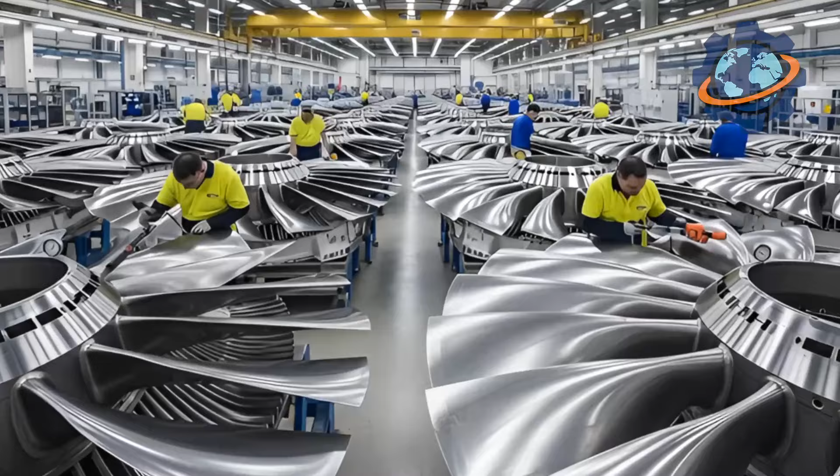Every second, jet engines spinning at 12,000 revolutions per minute thrust hundreds of passengers across continents. But here's what defies physics. Inside those engines, turbine blades made of nickel alloy operate at 3,000 degrees Fahrenheit, temperatures exceeding their own melting point by 200 degrees. Picture holding ice cubes in boiling water without them melting. That's the metallurgical miracle happening 35,000 feet above your head.

How does metal survive temperatures that should liquefy it? How do engineers grow crystals larger than your hand from molten metal? Stick around till the end, you'll discover the jaw-dropping secret of single crystal manufacturing that eliminated metal's greatest weakness, and why a single turbine blade costs more than your car yet lasts 20 years in literal hell.

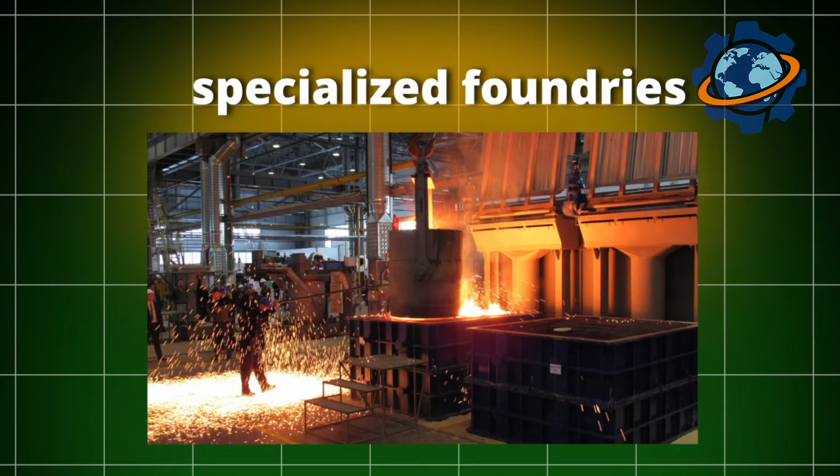The story begins in specialized foundries where cleanroom standards rival semiconductor fabs. These facilities maintain air purity of less than 100 particles per cubic foot, 10,000 times cleaner than normal atmosphere. Even microscopic dust particles cause catastrophic flaws in turbine blades spinning at speeds where centrifugal forces generate stresses exceeding 70,000 pounds per square inch. That's pressure crushing steel like aluminum foil.

Workers suit up in full-body cleanroom gear before entering casting halls. Inside, massive vacuum furnaces standing 2 stories tall and weighing 80 tons create environments replicating outer space. Vacuum pumps evacuate air until pressure drops to 1/1,000,000th of atmospheric pressure. At these conditions, materials behave differently. Impurities vaporize instantly. Gases trapped in metal escape, leaving behind purity impossible at normal pressure. Processing single batches costs $50,000 in electricity alone.

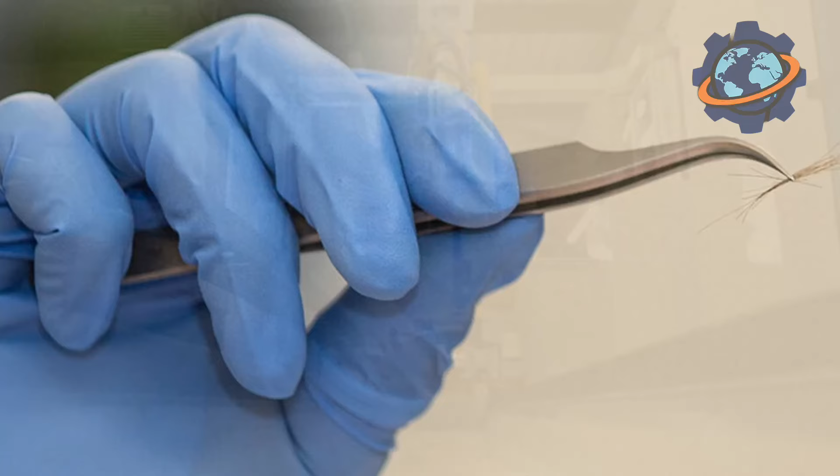Next comes mold preparation, where ceramic shells, think pottery on steroids, get built layer by microscopic layer. Technicians dip wax patterns shaped like turbine blades into ceramic slurry 10 times, waiting hours between coats. Each layer adds thickness thinner than human hair. After 20 days of coating and drying, workers melt wax away in autoclaves, leaving hollow ceramic molds with internal channels more complex than human circulatory systems.

These molds contain passages narrower than spaghetti strands, designed to cool blades from inside during operation. Some channels measure just 0.008 of an inch across, thinner than credit cards. Manufacturing these passages requires such precision that lasers verify every dimension. One blocked cooling hole means blade failure at 300 degrees lower temperature. That's the difference between safe flight and catastrophic engine disintegration at cruise altitude, scattering turbine fragments through the fuselage like shrapnel.

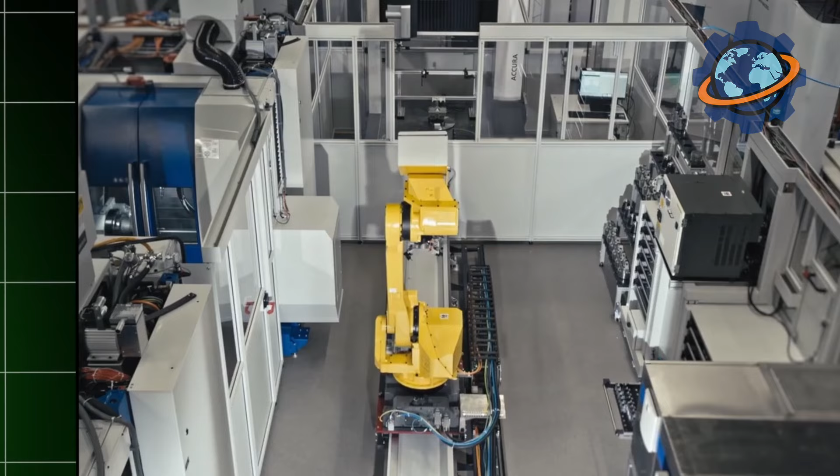Giant crucibles containing nickel-based superalloy. Mixtures of nickel, chromium, cobalt, aluminum, titanium, plus 6 other elements in exact proportions. Heat to 2,700 degrees Fahrenheit. Picture liquid metal glowing white like miniature stars captured in ceramic containers. This superalloy, developed through decades of research, contains more expensive elements per pound than fine jewelry. A single turbine blade uses materials costing $800 before any manufacturing begins.

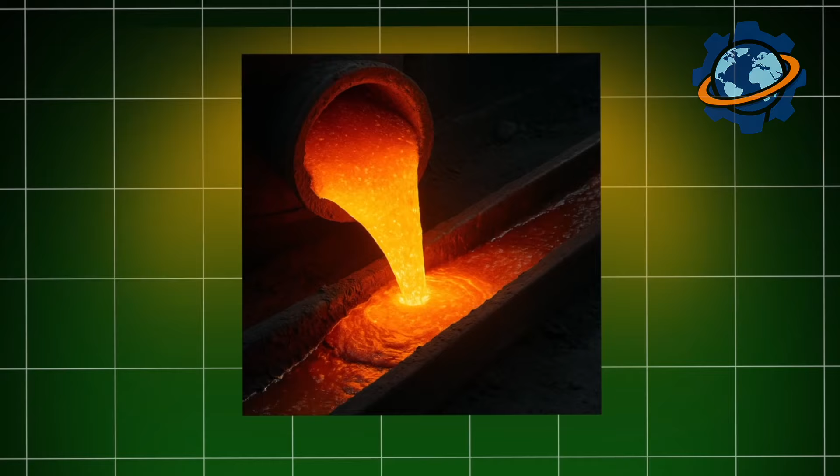Robotic arms lower ceramic molds into this molten inferno with precision measured in thousandths of inches. Timing matters critically here. Pour too fast, turbulence creates defects. Too slow, metal solidifies prematurely. Furnaces tilt at exactly 2 degrees per second, filling mold cavities in 17 seconds. During this pour, metal temperature drops 300 degrees, requiring computer-controlled heating to maintain consistency. One temperature fluctuation of 5 degrees ruins the casting, wasting months of preparation. Now comes the magic.

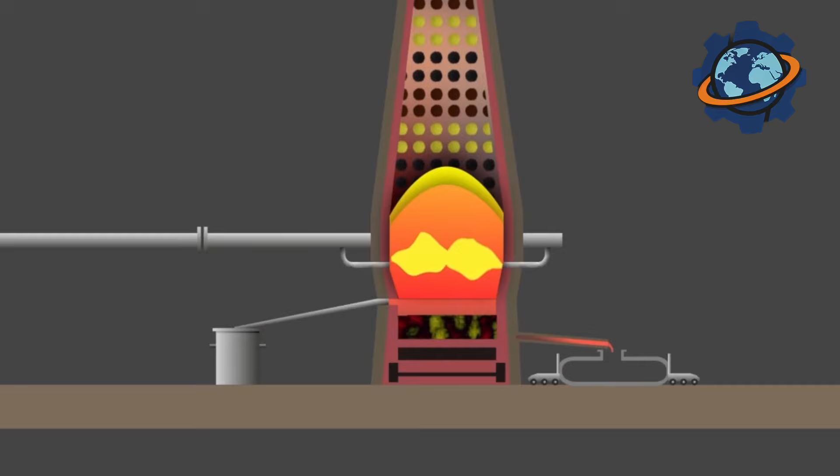Directional solidification. The filled mold sits atop a water-cooled chill plate at 70 degrees Fahrenheit while surrounded by heating elements maintaining 2,400 degrees above. This creates the steepest temperature gradient in metallurgy, over 2,000 degrees difference across 6 inches. That's transitioning from Arctic to volcanic conditions in the space between your thumb and pinky. Slowly, incredibly slowly, a computer-controlled mechanism lowers the mold through the furnace at speeds of 6 inches per hour. Picture watching paint dry, then slowing that down tenfold.

As the mold descends, metal solidifies from bottom upward in a razor-thin freezing front. This directional cooling forces crystal growth in one direction only, upward, eliminating horizontal grain boundaries where cracks normally form. The process takes 14 hours for a 4-inch blade. Rush it by even 10% and polycrystalline grains form, destroying blade strength. But here's where physics becomes art.

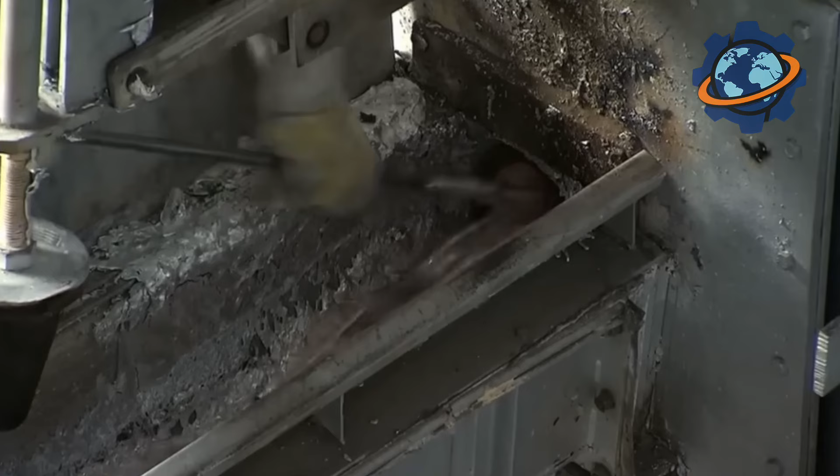At the mold bottom sits a grain selector, a corkscrew-shaped passage so narrow only one crystal nucleus fits through. As metal solidifies upward, countless tiny crystals form at the chill plate. They compete, growing upward like metallic trees racing toward sunlight. Most hit the spiral walls and stop. Only the perfectly aligned crystal, the one matching the spiral's orientation, passes through this metallurgical gauntlet.

This step is critical because it ensures the entire blade, every atom from root to tip, belongs to one continuous crystal lattice. No grain boundaries exist anywhere. Normal metals contain millions of grain boundaries per cubic inch. Single crystal blades contain 0. Without boundaries, there are no weak spots where atoms slip past each other under stress.

The crystal structure extends uninterrupted through the entire blade like a 3-dimensional molecular Kevlar vest, with atoms locked in perfect geometric formation. After solidification, blades undergo solution heat treatment at 2,200 degrees Fahrenheit for 2 hours, then quench in inert gas. This locks crystal structure permanently and precipitates microscopic strengthening phases throughout the lattice.

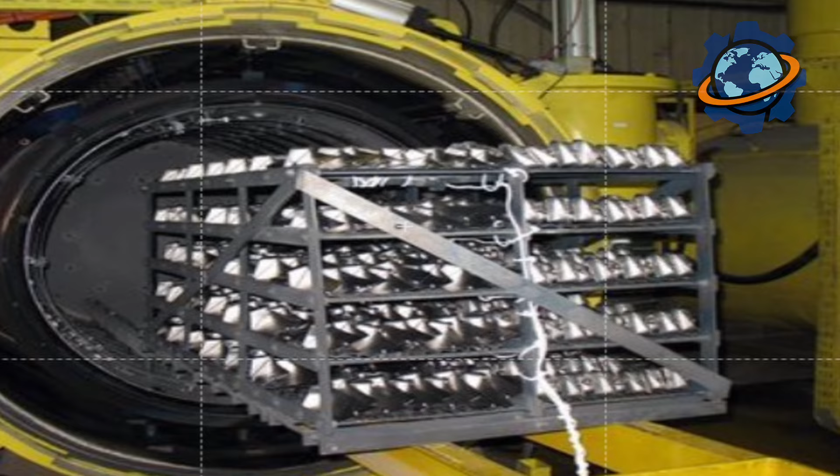Next comes aging heat treatment, multiple cycles at precisely controlled temperatures that cause nanoscale particles to form. These particles, called gamma-prime precipitates, occupy 70% of the alloy's volume. Picture this. Imagine a 3-dimensional checkerboard where hard particles pin the crystal lattice, preventing atoms from sliding. These precipitates remain stable at temperatures where other metals liquefy.

They're the secret allowing nickel alloys to maintain strength at 3,000 degrees, temperatures where aluminum vaporizes, titanium melts, and even steel becomes taffy. The heat treatment process takes 96 hours of precise temperature control. Deviate by 15 degrees at any point and mechanical properties drop 40%.

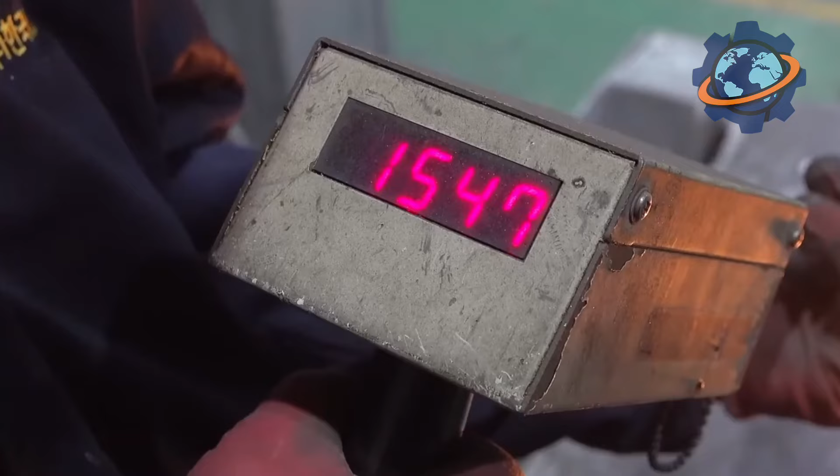Coating application transforms already sophisticated blades into thermal protection systems. First, a metallic bond coat, aluminum-rich alloy, gets applied via high-velocity plasma spray at 20,000 degrees Fahrenheit. Metal particles accelerate to twice the speed of sound, impacting the blade surface with such force they cold weld instantly. This creates a rough surface for subsequent layers while providing oxidation resistance.

Then comes the thermal barrier coating, Yttria-Stabilized Zirconia ceramic, applied atom layer by atom layer using electron beam physical vapor deposition. In vacuum chambers, electron beams vaporize ceramic ingots. The vapor condenses on rotating blades, building up a coating 0.008 of an inch thick with a columnar microstructure full of microscopic pores. These pores act like thermal insulation, trapping air pockets that reduce heat transfer.

The ceramic coating lowers blade temperature by 400 degrees, the difference between survival and meltdown. Modern engines couldn't exist without this coating technology. This wasn't always possible. Back in 1940, early jet engines used cast iron turbine blades lasting 20 hours before failure. Temperatures barely reached 1,400 degrees Fahrenheit.

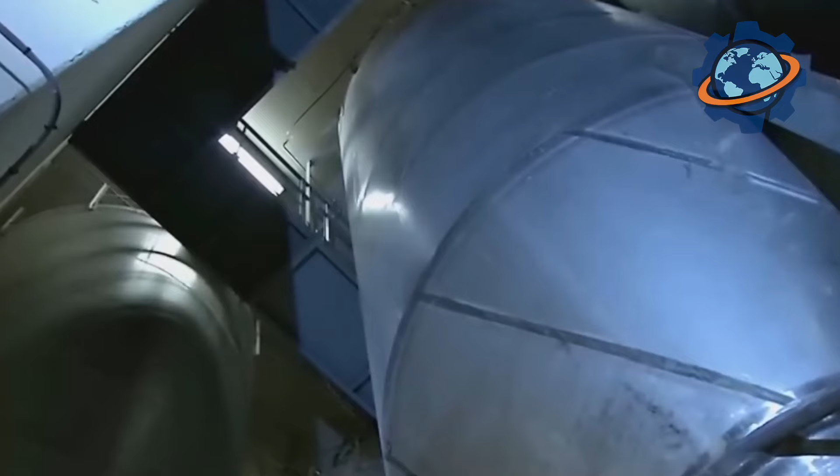The breakthrough came when Pratt & Whitney researcher Francis VerSnyder invented directional solidification in 1966, eliminating transverse grain boundaries and doubling blade life overnight. The true revolution arrived in 1982 when General Electric and Pratt & Whitney independently perfected single crystal casting. Turbine inlet temperatures jumped from 2,000 degrees to 3,000 degrees Fahrenheit, a 50% increase enabling massive efficiency gains. Modern turbofan engines achieve fuel efficiency triple that of 1960s designs.

Today, advanced engines like the GE9X powering Boeing 777X aircraft operate at 3,200 degrees, with pressure ratios reaching 60-to-1. These engineering advances cut aviation fuel consumption by 65% per passenger mile over 50 years. Carbon emissions dropped by 12% when replacing older turbine blades with modern single-crystal versions in existing engines, equivalent to removing 18 million cars annually from global fleets.

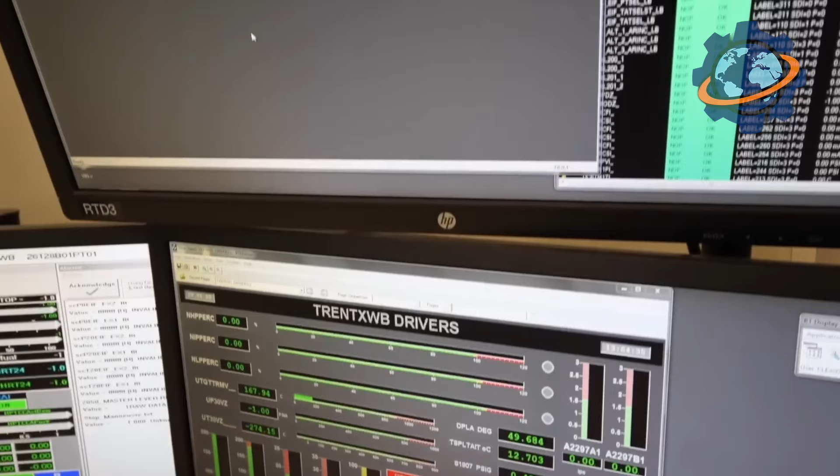Airlines save over $47 billion yearly through improved fuel efficiency. Maintenance costs drop 58% because single-crystal blades last 3 times longer than conventional ones. So here's the secret promised. These blades don't actually survive above their melting point through material strength alone.

They're actively cooled by air bled from the compressor, flowing through those microscopic internal channels at supersonic speeds. This cooling air, already compressed to 400 degrees Fahrenheit, seems hot by human standards but runs ice cold compared to the 3,000-degree combustion gases outside. Combined with ceramic coatings reflecting heat like mirrors, the actual metal temperature stays below 2,000 degrees, hot enough to glow orange but survivable. From molten metal to flying miracles, the cycle completes.

Single crystal turbine blades represent humanity's most sophisticated metal casting achievement. Objects where every atom's position matters, where crystal orientation determines survival, where manufacturing tolerances make computer chips look crude. We've engineered metal to survive in conditions nature never intended, creating materials that work at their physical limits. That's not just manufacturing, that's molecular architecture enabling the modern world's ability to shrink distance itself.

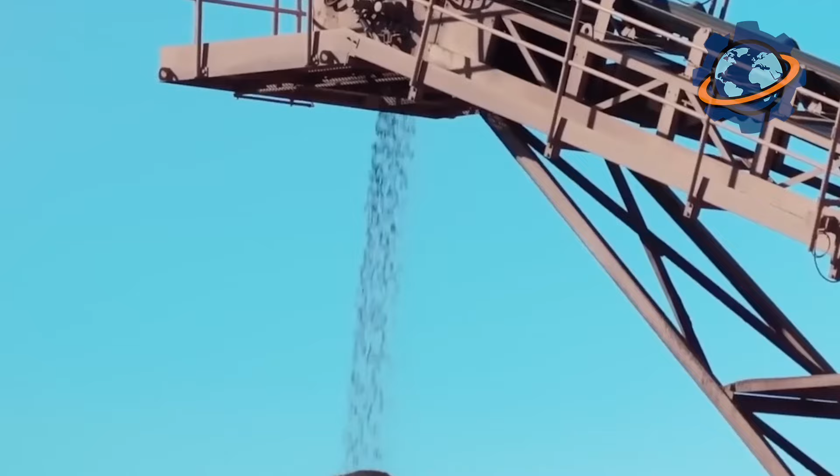Stick around till the end. You'll discover why iron shaped human history more than gold ever did, and the jaw-dropping secret hiding inside every bridge, car, and building around you right now.

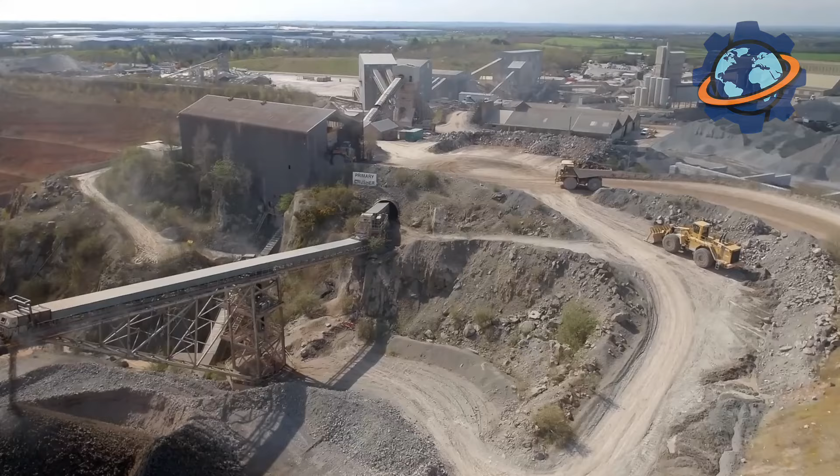The story begins in Western Australia's Pilbara region, where iron mountains stretch across landscapes older than dinosaurs. Massive excavators, standing 8 stories tall, picture buildings that walk, tear into rust-red cliffs with bucket teeth weighing 12 tons each. These mechanical giants rip through rock layers formed 3 billion years ago when Earth's oceans first rusted.

Next comes crushing, where house-sized jaw crushers, imagine dinosaur mouths made of hardened steel, pulverize boulders into gravel-sized chunks. With deafening roars splitting eardrums even through protection, these crushers generate forces exceeding 20,000 pounds per square inch. Clouds of red dust billowing upward create artificial sunsets visible from space satellites.

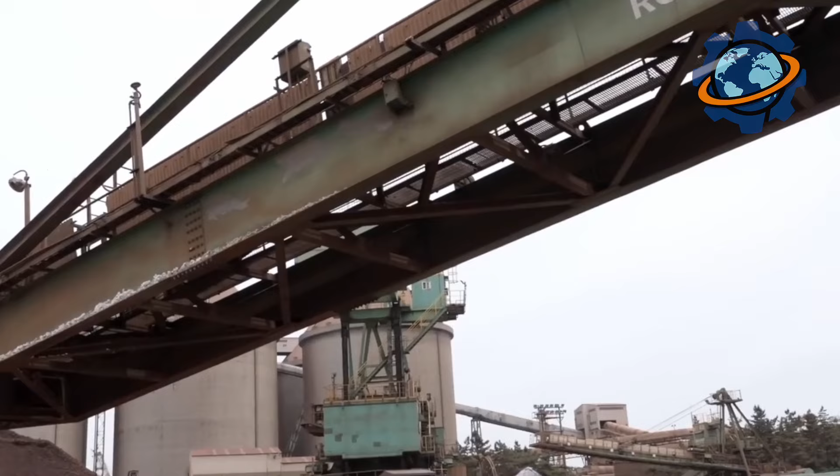Conveyor belts stretching 12 miles long, longer than Manhattan, transport crushed ore at 18 miles per hour. Workers riding inspection carts traverse distances requiring 25 minutes one way. That's enough belt to wrap around 300 football fields. Every hour, 50,000 tons flow through this system, weight equivalent to 5 Eiffel Towers moving continuously past checkpoints.

Giant grinding mills, standing 5 stories tall, with diameters matching Olympic swimming pool widths, pulverize rock into fine powder. Inside these rotating drums, 20-ton steel balls, each weighing more than shipping containers, tumble with ore, creating grinding thunder heard miles away. Operators monitor vibrations. Wrong frequencies mean catastrophic bearing failures, costing millions.

At rotation speeds creating gravitational forces triple normal Earth gravity, particles shrink to powder finer than talcum. Processing 8,000 tons hourly, that's filling semi-truck after semi-truck every 30 seconds. This powder, called concentrate, contains 65% iron. Magnetic separators then extract iron particles using forces strong enough to levitate railroad spikes, leaving waste rock behind.

Next comes the blast furnace, a towering inferno standing 30 stories high, its steel shell glowing dull orange even from outside. At internal temperatures exceeding 3,000 degrees Fahrenheit, hot enough to vaporize aluminum instantly, iron ore transforms into liquid metal. Picture Dante's Inferno engineered with precision. Measured charges of iron ore, coke, and limestone descend from the top, while superheated air blasts upward at 2,000 degrees from ring-shaped nozzles called tuyeres.

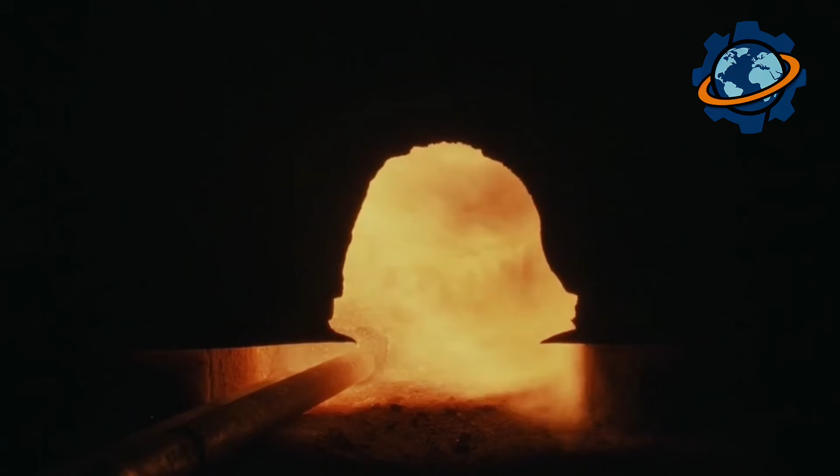This creates a raging chemical storm, where carbon monoxide rips oxygen from iron oxide molecules. The reaction releases enough heat to melt granite. Every 3 minutes, sensors check 20 different parameters. Without precision, furnaces explode with force demolishing city blocks. The blast furnace operates continuously for 15 years, never cooling, never stopping, like Earth's core relocated to industrial facilities.

Inside this chemical reactor, materials descend through distinct zones. Upper regions preheat incoming ore. Middle zones drive off moisture and carbon dioxide. Lower depths become hell itself, where iron liquefies. At the hearth bottom, molten iron collects at 2,800 degrees Fahrenheit, dense as lead but flowing like water.

Every 4 hours, workers drill through clay-plugged tap holes. Liquid iron erupts in blinding white rivers, flowing through ceramic channels into railroad cars holding 300 tons each. This step is critical because timing determines metal purity. Tap too early, slag contaminates. Too late, furnace pressure ruptures containment walls.

After tapping, slag, lighter impurities floating atop molten iron, gets diverted into separate channels. This glowing amber liquid, essentially liquefied rock, contains calcium, silicon, and aluminum oxides stripped from ore. Rather than waste, it becomes roadbed material and cement ingredient recycled at 98% rates globally.

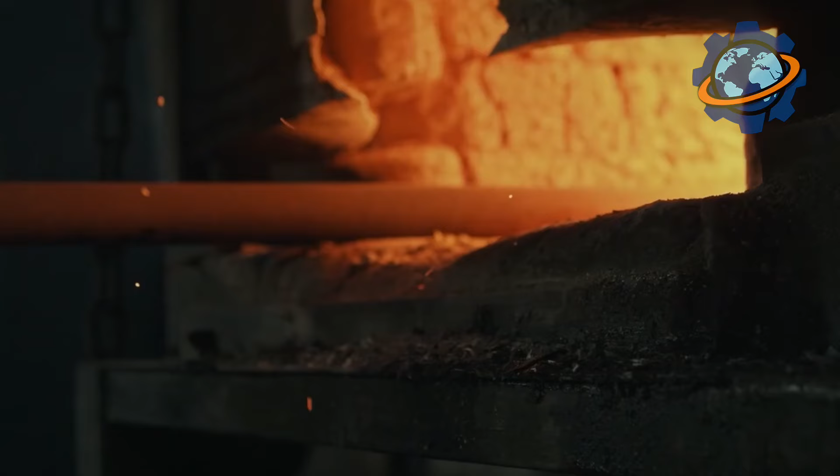The molten iron, called pig iron, contains 4% carbon, too brittle for construction. Picture glass that looks metallic. Drop pig iron from waist height, it shatters into fragments. Next comes the basic oxygen furnace, where pure oxygen blasted at supersonic speeds through 3-foot diameter lances burns away excess carbon in 17 minutes. Flames shooting 70 feet high, temperatures hitting 3,200 degrees, create hurricane-force winds inside steel vessels holding 350 tons of liquid metal.

Steel making requires precision rivaling brain surgery. Computer-controlled oxygen flow adjusts by milliseconds. Operators add exact amounts of manganese, silicon, chromium, elements changing steel properties dramatically. Too much carbon, steel cracks in winter cold. Too little, metal bends under load.

Picture this: alloying elements get injected via submerged lances. Electromagnetic stirring, invisible but powerful, homogenizes composition. Samples extracted every 3 minutes get analyzed via spectrometers, determining chemistry within seconds. Modern furnaces achieve carbon content accuracy to 0.01%, the difference between a skyscraper standing or collapsing.

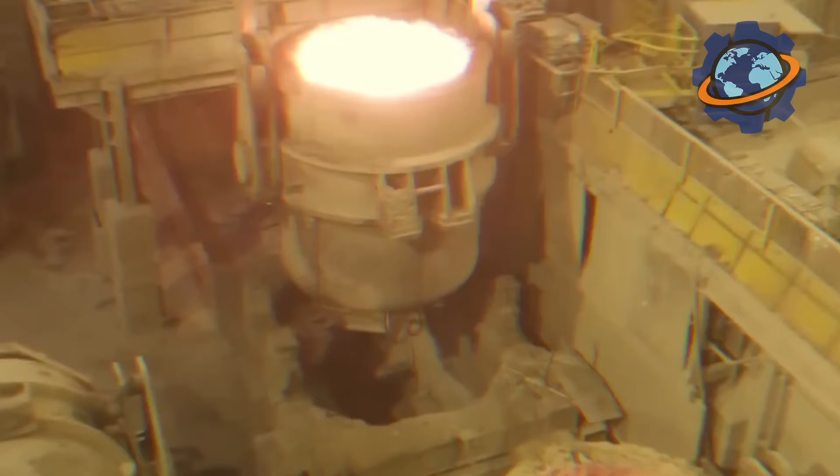After refining, liquid steel flows into continuous casting machines producing slabs 30 feet long, weighing 25 tons, at rates of 1 slab every 90 seconds. This wasn't always so advanced. Back in ancient Anatolia around 1300 BC, Hittite metallurgists discovered heating iron ore with charcoal produced workable metal. That breakthrough, accidental furnace conditions reaching iron's melting point, changed human civilization forever. Iron tools outperformed bronze, enabling an agriculture revolution.

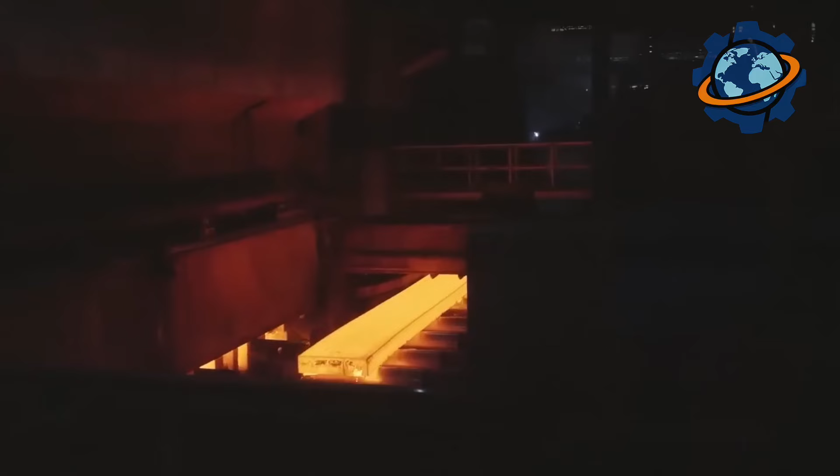The breakthrough came when British inventor Henry Bessemer patented his converter in 1856, slashing steel production time from 24 hours to 17 minutes. Suddenly, steel costs dropped 90%. This single invention built modern cities. Skyscrapers, bridges, railroads exploded across continents. Today, global steel production exceeds 1.9 billion tons annually. That's enough to build 75,000 Eiffel Towers yearly, or manufacture 43 million automobiles, or construct bridges connecting every coastline on Earth.

Carbon emissions drop by 62% when using recycled steel versus virgin ore, equivalent to removing 12 million cars annually. Industry saves over $80 billion yearly through scrap recycling. Processing costs drop 43% because melting scrap requires 1/3 the energy of blast furnaces.

So here's the secret promised. Every ton of steel you see, bridges, buildings, cars, will be recycled indefinitely. Unlike plastic decomposing into microparticles or paper pulping into mush, steel never degrades. Magnetic separation extracts it perfectly from demolished structures.

That girder in your office building might contain steel from 1930s locomotives. Your car's frame could include battleship armor from World War II. Nothing disappears. Metal merely transforms, reborn eternally. From ancient mountains to modern marvels, the cycle completes.

Iron, humanity's most essential metal, circulates through civilization like blood through veins. We're not consuming Earth's iron, we're borrowing it, briefly, before passing it forward to futures we'll never see.

Every year, over 30 million tons of bamboo are harvested worldwide. But did you know that this seemingly ordinary grass can transform into steel, silk, and even concrete? It grows faster than any tree, absorbs more carbon dioxide than a forest, and doesn't require replanting. But the most interesting part is what's hidden inside its fibers.

In this video, we'll show you how giant green stalks travel from plantations to ultra-durable flooring and delicate fabric. And if you watch until the end, you'll learn one shocking fact that will change your perception of the future of ecology.

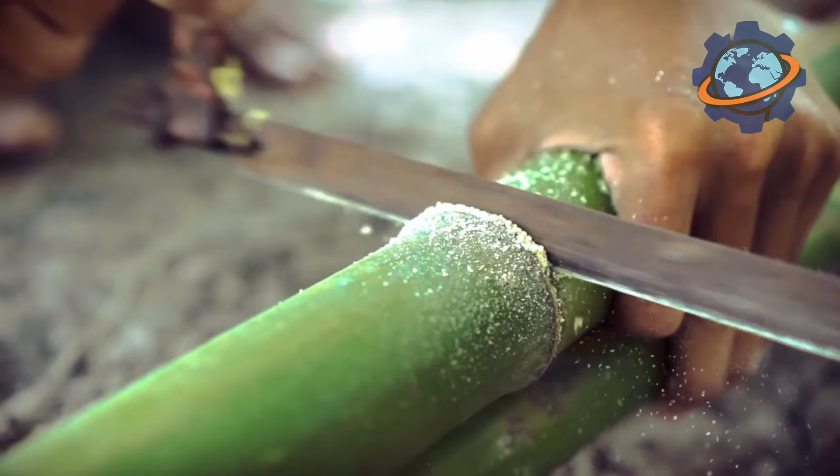It all begins on vast bamboo plantations, covering millions of acres around the world. These are not chaotic thickets, but carefully managed farms. Unlike forests, bamboo does not require replanting. When one stalk, or culm, is cut, its extensive root system, called a rhizome, immediately sends up new shoots.

This makes it one of the most sustainable resources on the planet. One plantation can yield harvests for decades without harming the soil. Moreover, a bamboo forest absorbs 35% more carbon dioxide and produces 35% more oxygen than an equivalent area of trees.

Harvesters, armed with simple machetes or handsaws, selectively cut only mature stalks, whose age can be easily determined by color and texture. Young shoots are left to grow further, ensuring the continuity of the cycle.

One such mature stalk can reach 60 feet in height and weigh over 100 pounds, making its transportation from the plantation to the primary processing plant a complex logistical task. When these green towers arrive for processing, their radical transformation begins.

First, the long stalks are cut into manageable sections. Then, they are fed into a special machine that, with a deafening crack, splits the round sections into long strips. The next step is to remove the outer green skin and inner nodes, leaving clean, light bamboo planks.

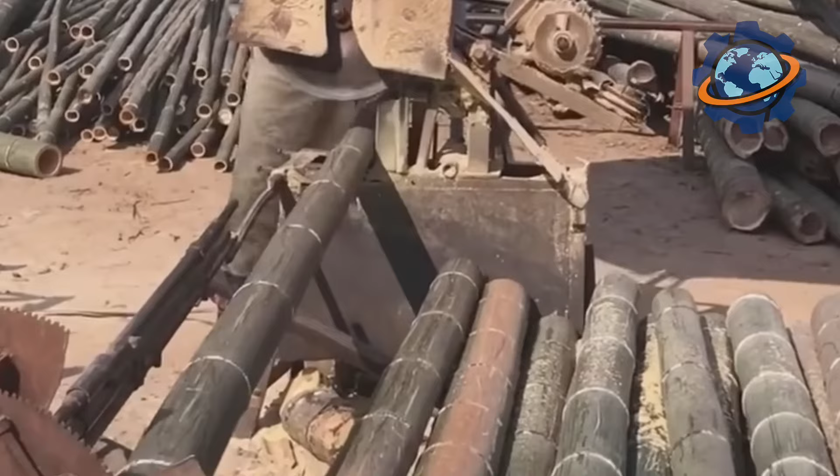But inside these planks still lurks an enemy of durability: starch and sugar, which are a favorite food for insects and mold. To get rid of them, the planks are submerged in huge vats of boiling water or a hydrogen peroxide solution for several hours. This hot bath not only sterilizes the bamboo, but also washes out all the nutrients.

After this, the planks are sent for drying. Some producers dry them in the open air, but for industrial scales, they are loaded into giant kiln dryers, where they spend several days until their moisture level drops from 50% to an ideal 8 or 10%. This stage is critically important, as any residual moisture can lead to warping and cracking of the finished product.

But the journey from a 60-foot pole to a smooth floorboard requires even more impressive engineering. The dried planks pass through milling machines that give them a perfectly rectangular shape. Then begins a process similar to making industrial lasagna.

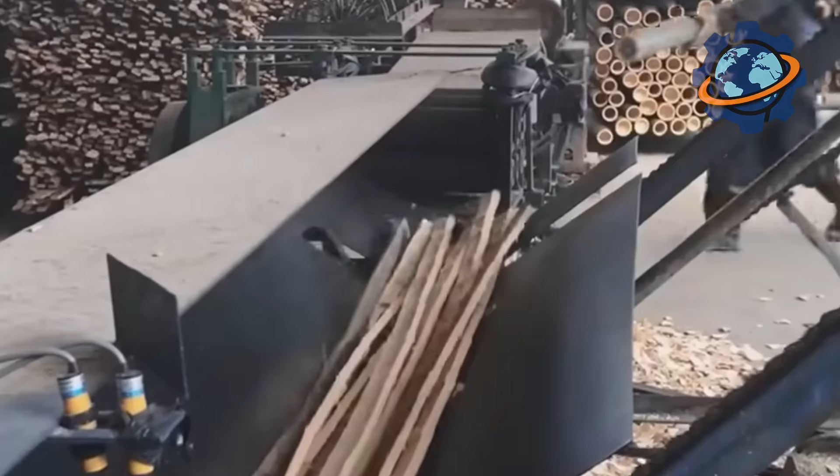To create horizontal flooring, the planks are laid in a single layer and glued under pressure. For vertical flooring, the planks are placed on their edge and pressed from the side, creating a denser pattern. But the real marvel is the strand woven technology.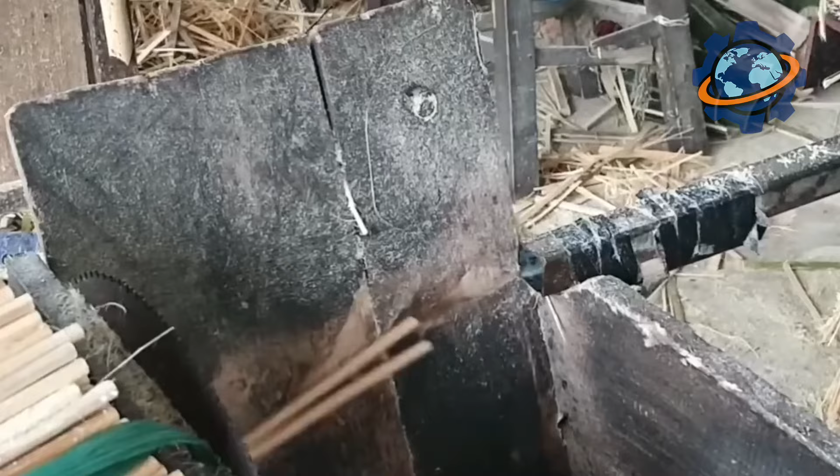Here, the bamboo planks are not just glued together, but completely shredded into long fibers, mixed with an environmentally friendly resin, and loaded into huge steel presses. Under infernal pressure, reaching 3,000 pounds per square inch, and high temperature, this mass transforms into an extremely dense, monolithic block.

The hardness of such flooring on the Janka scale can exceed 5,000 units, making it more than 3 times harder than oak, and more resistant to scratches and dents than most traditional wood species.

However, hardness is only one of bamboo's facets. Its other superpower is the ability to transform into something incredibly soft and silky. The process of creating bamboo fabric is a true industrial alchemy. The most common method, known as the viscose process, begins with grinding the bamboo raw material into a cellulose pulp.

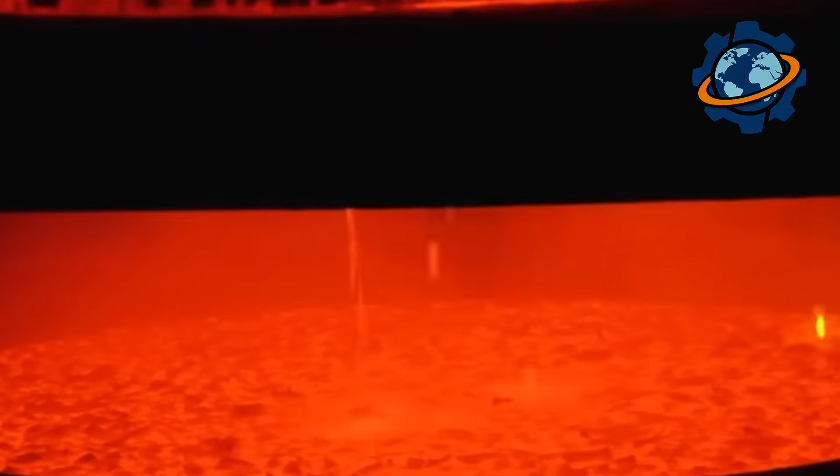This pulp is then submerged in a sodium hydroxide solution and then carbon disulfide, which turns it into a thick, viscous liquid. This liquid, resembling honey, is forced under pressure through the finest holes of a metal plate called a spinneret. Imagine a microscopic shower. Emerging from the holes, the thin streams enter a bath of sulfuric acid, where they instantly solidify, turning into endlessly long fibers. These fibers are then washed, bleached, dried, and twisted into yarn, from which fabric is woven.

Despite the complex chemical process, the final product is biodegradable and has unique properties. It is extremely soft, hypoallergenic, has natural antibacterial properties, and breathes wonderfully, making it ideal for clothing and bedding. The global bamboo market is colossal and is projected to exceed $100 billion in the coming years.

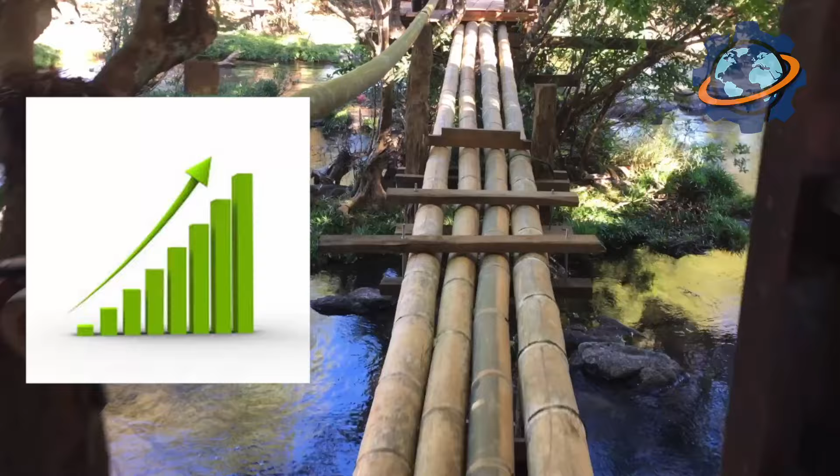Annually, over 30 million tons of bamboo are harvested worldwide, and this figure is only growing. From kitchen cutting boards and toothbrushes to construction scaffolding capable of supporting the weight of concrete and elements in premium class cars, this giant grass demonstrates its versatility. It is a testament to how nature, multiplied by human ingenuity, can offer sustainable, strong, and beautiful solutions for countless tasks, turning a fast-growing straw into the gold of the modern world.

Bamboo grows both in the wild and on specially created plantations. Its natural habitat mainly covers tropical and subtropical regions of Asia, where it is an integral part of local ecosystems. At the same time, thanks to its unique properties and wide range of applications, bamboo is actively cultivated on plantations around the world. It is cultivated for the production of building materials, textiles, paper, interior items, and as a source of biomass.

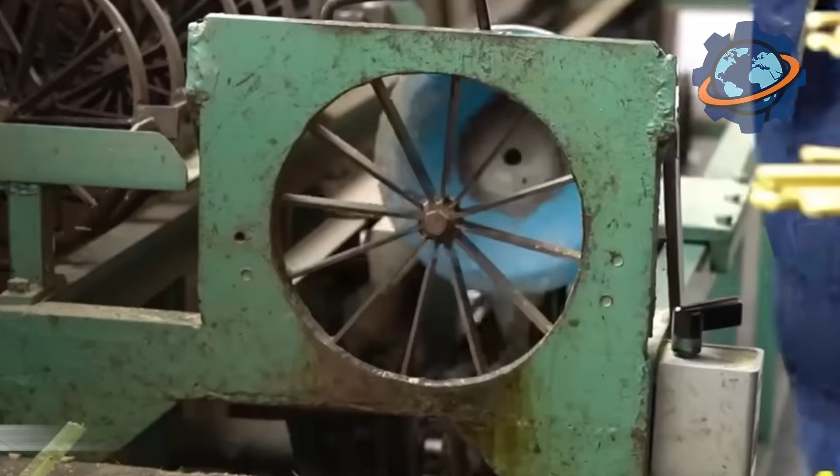In the wild, there are over 1,000 species of bamboo. It is a perennial evergreen plant belonging to the grass family. Bamboo is known for its extremely fast growth. Some species can grow several tens of centimeters per day. Bamboo blooms very rarely, and after flowering and fruiting, the plant usually dies. Growing bamboo requires certain knowledge and care, including proper planting, regular watering, and choosing the right variety for specific climatic conditions. There are even ornamental types of bamboo that are grown in gardens and at home.

Every year, the world lays down over 1 billion tons of asphalt, the material that modern civilization would literally grind to a halt without. But few people know that every foot of road is the result of a complex alchemy of stone, fire, and oil. It all starts with an explosion in a quarry and ends with a hot, black mass steaming under the wheels of a roller. In this video, you'll see how asphalt is born, from blasting rock to the final roller that polishes a new road. And if you stick around to the end, you'll learn a secret that most drivers don't even know exists.

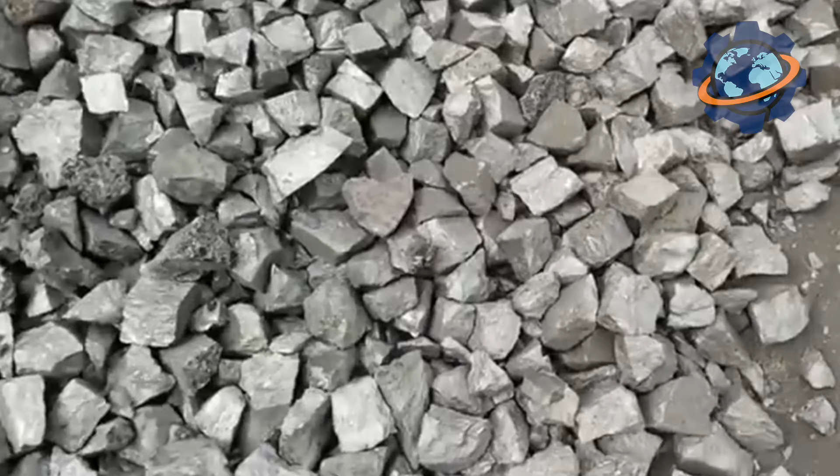Almost nothing goes to waste. That crushed old asphalt is then added to the new mix back at the plant. On average, new asphalt laid on our roads contains about 22% recycled material. The payoff here is huge, both economically and for the environment. First, it drastically cuts down on the need to quarry new stone and produce new bitumen, which saves natural resources and energy. Second, it makes the final product cheaper, saving billions of dollars from road maintenance budgets.

So, every car trip you take is a journey on a complex piece of engineering that not only withstands massive loads, but is also a prime example of an industrial ecosystem where the old is constantly reborn into the new, closing the loop and making the country's infrastructure a little more sustainable.

The story of asphalt doesn't start on the road. It starts in two completely different places. The first is a quarry. It's a massive wound on the face of the earth where rock is blasted out. It all begins with a loud explosion that shakes the ground for miles. Huge boulders break away from the rock face. Then, giant haul trucks with wheels taller than a person move in and haul these stone boulders to the primary crusher. This is a metal monster that crushes massive boulders into smaller chunks with its steel jaws and incredible force.

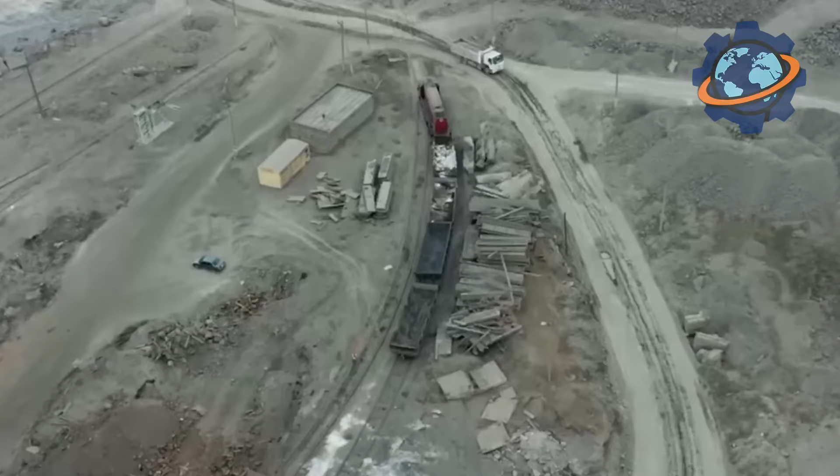But that's just the beginning. The stone then goes through a whole series of crushers and screens, giant vibrating sieves. The goal isn't just to crush the rock, but to carefully sort it by size. The result is entire mountains of clean, sorted stone, which we call aggregate. You've got everything here, from large, fist-sized rocks to fine crumbs and even dust, like sand. Each size is stored in its own separate pile.

It's like in your kitchen, where you have flour, sugar, and salt, each ingredient separate, waiting for its turn. This is the skeleton of the future asphalt, making up 95% of its mass. The second place where asphalt is born is an oil refinery.

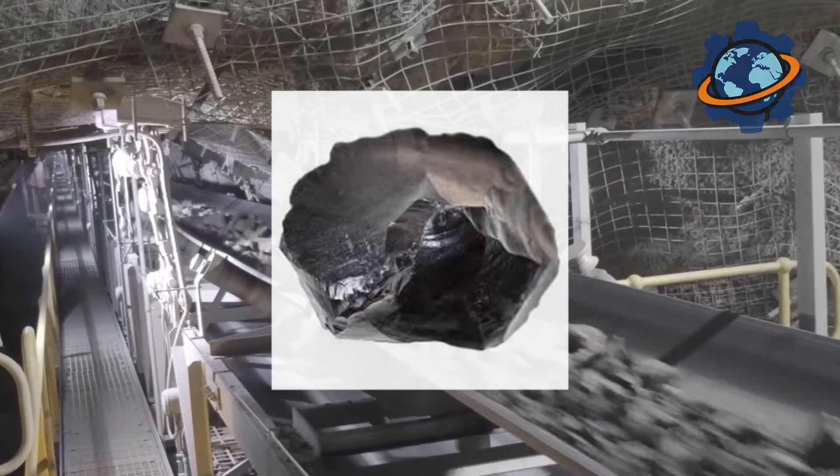When crude oil is processed into gasoline, diesel, jet fuel, and other light products, a thick, black, viscous substance is left at the very bottom of the distillation tower. This is bitumen. In its normal state, at room temperature, it's as hard as a rock. You can shatter it with a hammer. But if you heat it up, it becomes a liquid, like thick syrup.

It's this property, being solid when cold and liquid when hot, that makes it the perfect glue for our stone skeleton. Bitumen is the soul of asphalt. It's the black heart that holds everything together.

Now, let's head over to the asphalt plant. This is where all the ingredients come together. From a distance, it looks like a complex tangled metal jungle. Tall silos, endless conveyor belts, pipes, tanks, and a central tower with smoke rising from it. It's a real factory that works like a single, well-oiled machine.

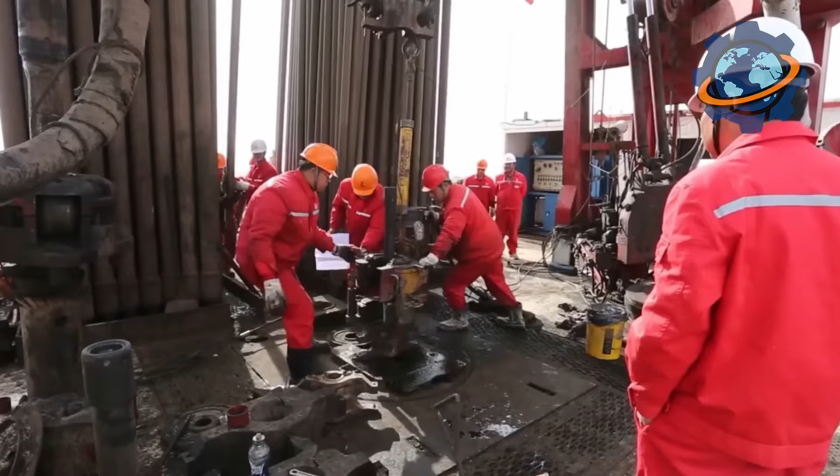Different sizes of aggregate are fed from separate bins onto a conveyor belt. But not just randomly. The whole process is controlled by a computer. An operator in a control booth inputs the exact recipe for the asphalt. Depending on where it's going to be used, a busy highway or a quiet side street, the recipe will be different. The computer knows exactly what percentage of large stone, medium, small, and dust is needed for the perfect mix. It's like baking a complex cake, where every gram counts.

This mix of stones begins its journey up a long, inclined conveyor and enters the heart of the plant, the drying drum. This is a huge, long tube that slowly rotates, set at a slight angle. From one end, a powerful burner blasts a roaring pillar of fire inside, like a jet engine. The temperature inside hits 300 degrees Fahrenheit. The stone, slowly tumbling inside this drum, heats up, and most importantly, gets completely dried out.

Moisture is the #1 enemy of good asphalt. Even a single drop of water can prevent the bitumen from sticking properly to the stone's surface. So, the stone has to be bone dry. After the drying drum, the hot, moisture-free stone is carried up by an elevator to the very top of the central tower.

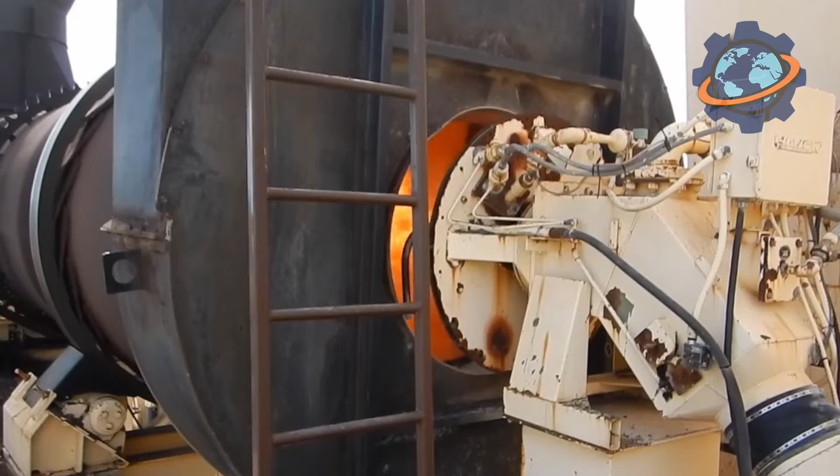There, it passes through another set of screens for a final quality check on the sorting, and then falls into hot storage bins. Meanwhile, in special insulated tanks, our black glue, the bitumen, is being heated up. It's also brought to a high temperature to make it fluid and runny. And now comes the climax. The computer gives another command.

A weigh hopper, with incredible accuracy, measures out the required amount of hot stone of each size from the different bins. Then, a precisely measured amount of hot liquid bitumen is sprayed into this superheated stone mix. This entire mass, stone and bitumen, is dropped into a mixing chamber called a pug mill. It's like a giant kitchen mixer, but instead of whisks, it has 2 powerful shafts with metal paddles.

These paddles churn the hot mass with enormous force, and in less than a minute, every single stone, every grain of sand, is coated in a thin, shiny film of black bitumen. Out of the chamber comes the finished asphalt, a uniform, steaming black mass with a characteristic oily smell.

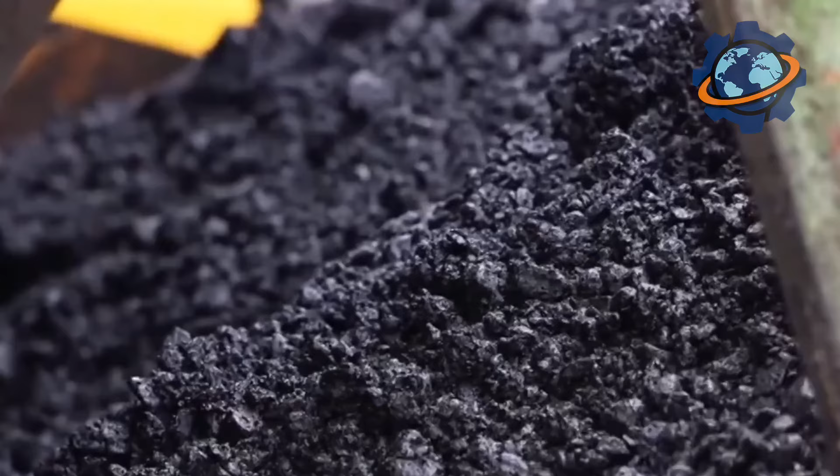Now this hot, freshly made product needs to be stored until it's shipped out. It's lifted and dumped into special insulated storage silos. They're like giant thermoses that can keep the asphalt hot for many hours, sometimes even days. Dump trucks pull up under these silos.

With a loud clang, a gate opens and several tons of hot asphalt pour into the truck's bed with a roar and a cloud of steam. The bed is always covered with a tarp to keep that precious heat in during transport to the paving site. At the construction site, the final act begins. The dump truck slowly unloads the hot mix into the hopper of a special machine, an asphalt paver.

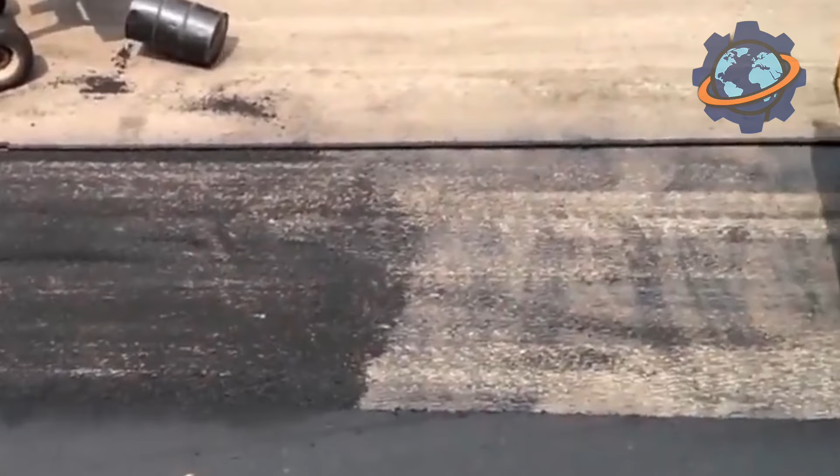This machine, moving forward slowly, evenly spreads the asphalt over the road surface, forming a perfectly level layer of a specific thickness. At the back of the paver is a heavy, heated plate called a screed. It does the initial compaction and gives the surface its first pass of smoothness, but the asphalt is still soft and loose. To make it strong, it needs to be compacted.

Right behind the paver follows a whole team of heavy road rollers. First come the large steel drum rollers, which use their immense pressure to squeeze the air out of the asphalt mix and force the stones to lock together tightly. Then, pneumatic tire rollers might be used, which knead the surface, making it even denser.

And in the final stage, smooth steel drum rollers pass over it again to give the road its final, smooth finish. As the asphalt cools, the bitumen turns from a liquid back into a solid. It permanently glues all the stones together, turning the loose mix into a strong, waterproof monolith. After a few hours, the road that was recently hot and soft becomes hard and ready for traffic.

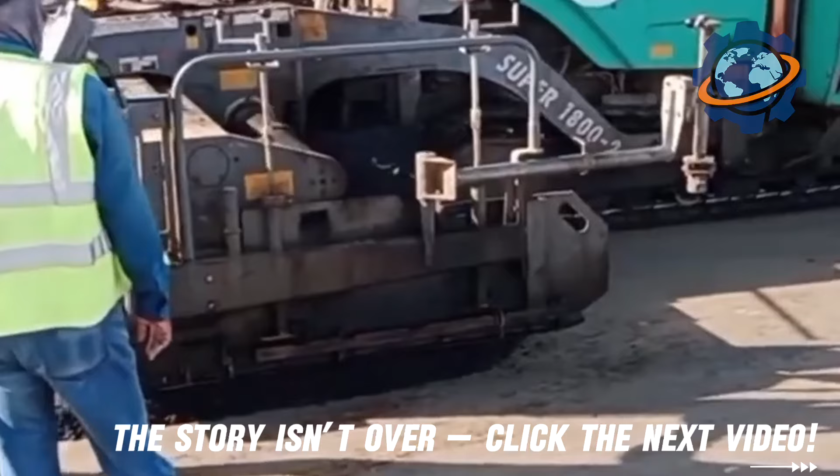And that's the whole point. From the explosion in the quarry to the heavy roller on the road, every stage of this process is designed to create a durable, reliable surface that will withstand thousands of cars every single day.

Every year, over 100,000 kilometers of new rails are laid across the planet, and every single one of them goes through hell first. Fire over 1,500 degrees, the crushing force of rollers, and jets of water that cut metal like glass. From scrap heap to gleaming steel, a rail's journey is like an initiation, where every step decides whether it survives or shatters under the first train.

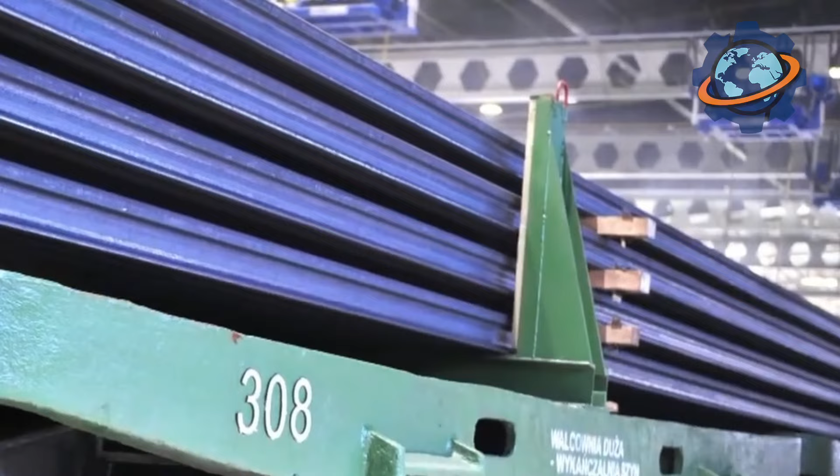But what makes this steel so perfect that it can handle thousands of tons of pressure every day without bending or cracking? Stick around, and you'll see how the arteries that move the entire world are born.

First, you gotta make the steel. A mix of scrap metal, iron ore, coke, and limestone gets dumped into the furnace, the raw ingredients for a future rail. The temperature in the blast furnace hits over 2,700 degrees Fahrenheit. That's 1,500 Celsius. Under that hellish heat, the metal turns liquid, glowing like the sun. Workers keep a close eye on the composition. Even an extra 0.1% of carbon can make the rail too brittle or too soft.

After melting, the molten steel is poured into molds, metal forms that create rectangular blocks called ingots or slabs. They don't look like a rail yet, just solid bars a few meters long and over a foot wide. After pouring, each blank is cooled, but not completely. It's kept warm to reduce stress during the rolling process.

This stage is the foundation for everything. If the steel comes out bad, even a perfect rolling job won't save it. So quality control here is almost a ritual. Chemists check the composition, metallurgists monitor the temperature, and automatic sensors track the cooling uniformity. Only when every single parameter is locked in does the blank move on into the fiery heart of the rolling mill.

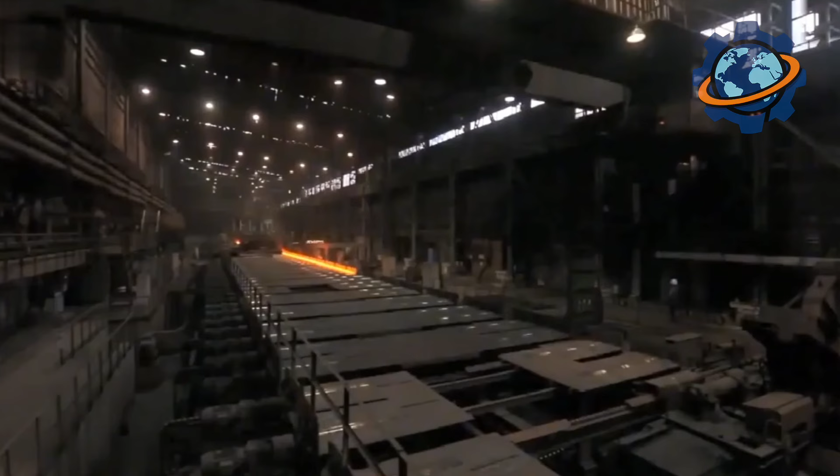In the rolling mill, massive billets, up to 20 meters long, are heated in furnaces to over 2,200 degrees Fahrenheit, 1,200 Celsius. The metal becomes pliable, like dough, but keeps its density and strength. The hot blank is immediately fed into reversing rolling stands. These are huge machines with heavy rollers. It passes through them several times, first to reduce its thickness, then to give it the right shape.

Each pass is a squeeze and stretch, gradually transforming the metal from a simple billet into a future rail with its complex profile: the head, the web, and the foot. To get the exact geometry, they use a final sizing roll. It's like the final polish of the shape, with tolerances on this step not exceeding 0.3 of a millimeter.

Right after rolling, while the rails are still hot, they go through a cooling process. They're either evenly blasted with air or left to cool on an open rack. It's crucial that the cooling is symmetrical, otherwise the metal could warp. To ensure a smooth, bump-free ride at high speed, individual rails are welded into long sections, up to 400 meters without a single joint. The main method is thermite welding.

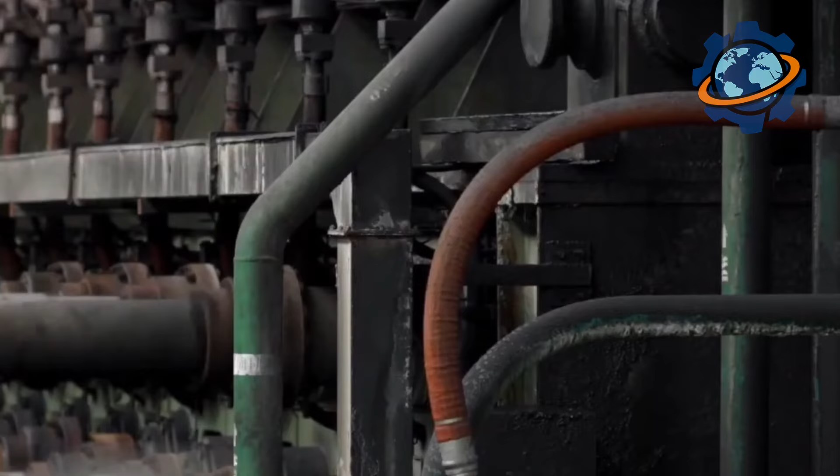In a special mold between two rails, a gap of a few millimeters is left. A molten steel mixture, created by the reaction of powdered aluminum with iron oxide, is poured in. The temperature hits a scorching 4,500 degrees Fahrenheit, 2,500 Celsius. This molten metal flows into both parts of the rail and fills the joint area. When it solidifies, it creates a monolithic bond, stronger than the rail itself.

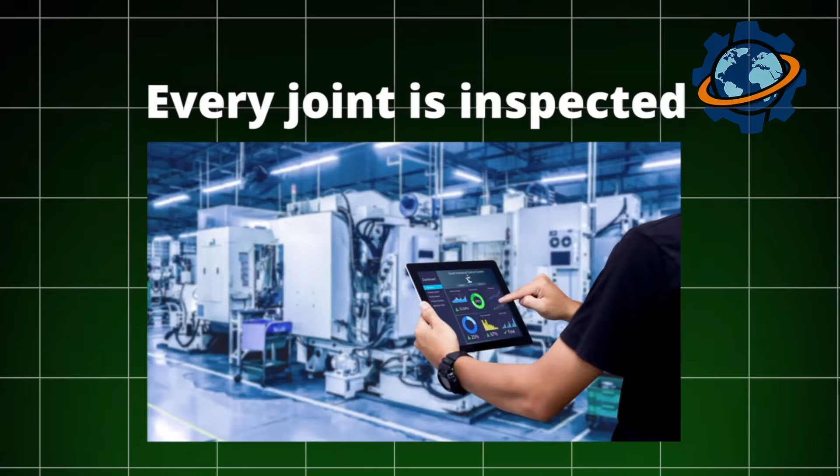After that, the excess metal is trimmed off, and the weld is ground down to a perfectly smooth level, without a single bump. Every joint is inspected, with ultrasound or eddy currents, to make sure there are no hidden micro cracks. These long rails are easier to transport than you'd think. They're either wound onto special drums or carried on platforms with pivoting supports.

And on the construction site, the sections are joined again, this time by welding or using special bolted joints. The result is a continuous rail line that stretches for kilometers without a single click. The same silent glide we've come to expect on high-speed trains.

But first, after rolling and welding, the rails are still alive. There's stress left inside the metal, and the grain structure needs to be stabilized. This is where heat treatment comes in, giving the rail its strength, wear resistance, and durability. And it looks almost like a metallurgical spa session.

The rail is rapidly heated to high temperatures, around 1,800 degrees Fahrenheit, 1,000 Celsius. This is done in furnaces, tens of meters long, where the temperature is controlled to the degree. At this heat, the steel's crystal lattice shifts into a new state, austenite. But the main event starts after that.

The rail is instantly cooled. Jets of high-pressure water are aimed along the head and web, the very parts the wheel rolls on. The temperature drops in a flash, and a new structure forms in the metal, martensite, an extremely hard, wear-resistant phase.

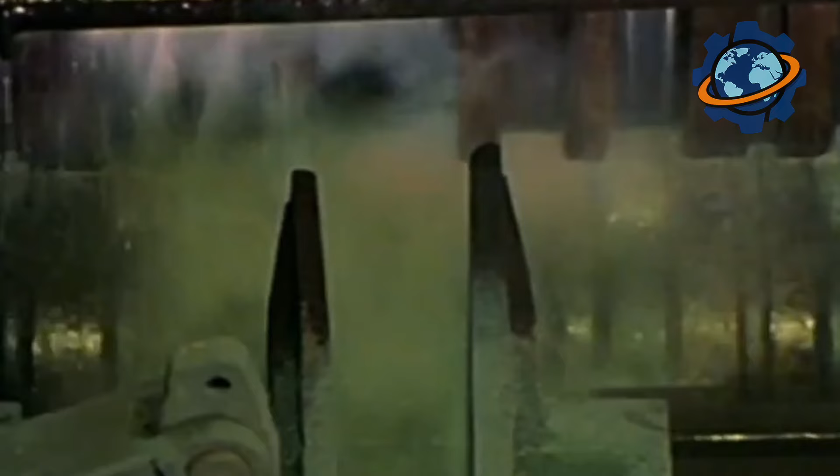But to avoid brittleness, the rail is slowly heated and cooled one more time. This balances the structure, relieves any extra internal stress, and ensures the rail can handle frost, heat, and thousands of trains a day. In the end, the metal holds its shape and withstands pressures of tens of tons per square inch without deforming.

Before a rail hits the road, it goes through a whole series of tough tests, like it's trying to join an army of high-speed transport. In special labs, it's checked for strength, hardness, geometry, and internal defects. First up, ultrasonic testing. High-frequency waves are sent into the rail. If there's a microcrack or void inside, the signal bounces back and flags the problem.

Then, hardness measurements along its entire length to make sure the heat treatment was uniform. At the same time, its straightness and profile are checked. Laser sensors scan every inch, detecting even tiny warps that could cause vibration or wear.

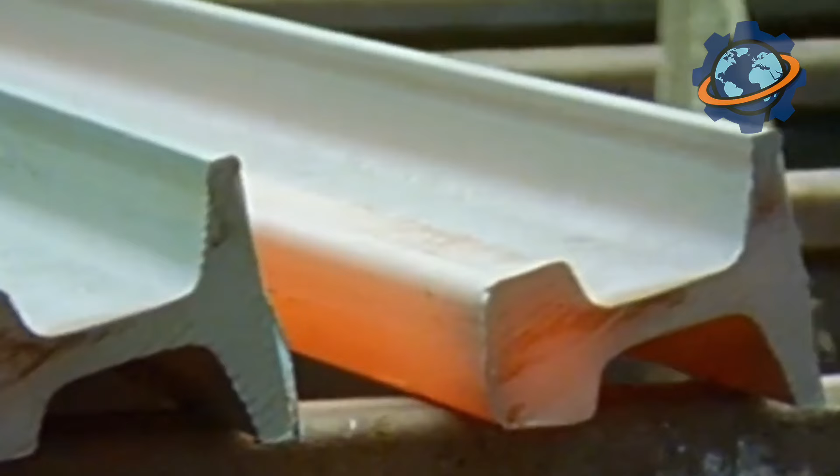And finally, bend and impact tests. A piece of the rail is loaded with pressure dozens of times greater than the weight of a train to make sure it can handle any challenge on the route. When the rail has successfully passed all the tests, it's time for its most important journey, to the installation site.

But how do you transport giant metal strips over 90 meters long? Regular trucks can't handle it. Here, they use special railway platforms with curved supports that reduce stress and prevent the rail from sagging or vibrating during transit. Sometimes, rails are transported already welded into even longer sections, from 400 to 600 meters.

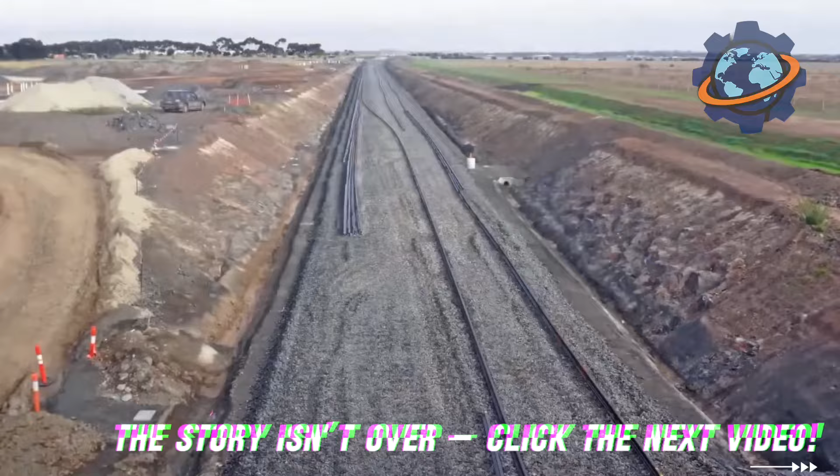Before installation, the rails are heated or cooled depending on the ambient temperature. This is to compensate for the thermal expansion and contraction of the metal. Otherwise, it would buckle in the heat or gaps would form in the cold. In practice, each rail is laid with these physical changes in mind, usually at a stress-free temperature point.

Imagine this. Every year, the world cranks out over 100 million tons of nuts and bolts, the invisible heroes of our industrial world. They hold together our bridges, our planes, our ships, and even our tallest skyscrapers. But few people know that behind every single one lies a process with precision down to 1,000th of an inch.

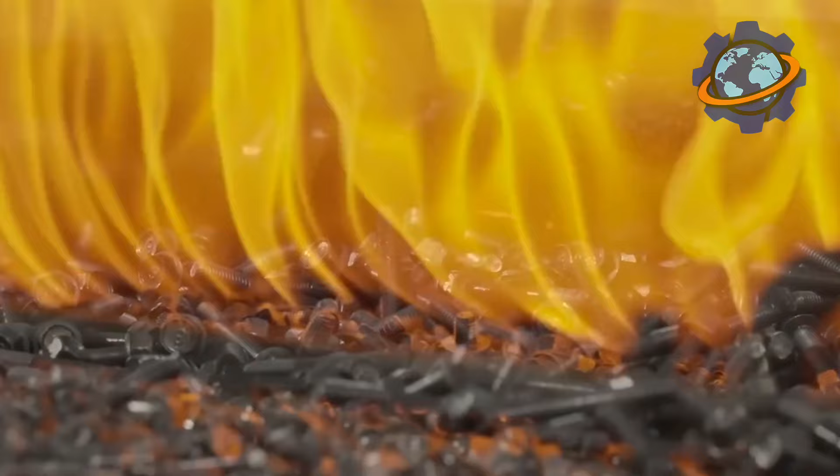We're talking metal cleaned in acid, forged under massive presses, hardened at over 2,000 degrees, and tested to its breaking point. So what makes an ordinary bolt strong enough to hold hundreds of tons? Stick around, and you'll learn the secret that turns a simple piece of steel into a part the whole world depends on.

A high-volume nut and bolt plant isn't just a factory. It's a high-tech powerhouse where raw steel becomes the hardware that holds our world together. The whole thing is a complex, multi-stage marathon of machining, stamping, heat treating, and non-stop quality control.

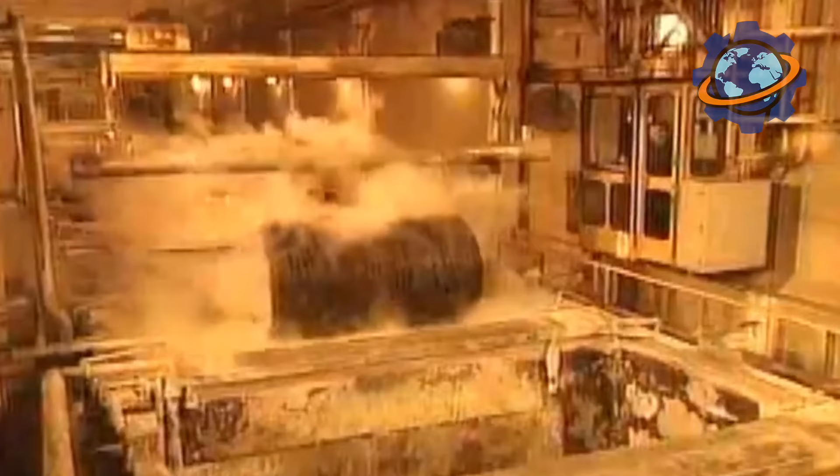It all starts with the raw material. High-quality steel wire rod comes in, but it's dirty. First, it needs a serious cleaning to get rid of rust and scale. The most common way to do that? A chemical bath. We're talking a process called acid pickling, where the steel gets a dip in sulfuric or hydrochloric acid. This stuff eats away all the grime, leaving the metal surface perfectly clean and ready for what's next.

After the acid bath, the wire is thoroughly rinsed with fresh water to get every last drop of acid off. Then it's dried. For an even deeper clean, some plants use sandblasting or mechanical grinding. You might even see a process called electropolishing, which zaps the surface to level it out and boost its rust resistance. On the big production lines, they combine everything: mechanical scrubbing, a chemical dip, a rinse, and a dry.

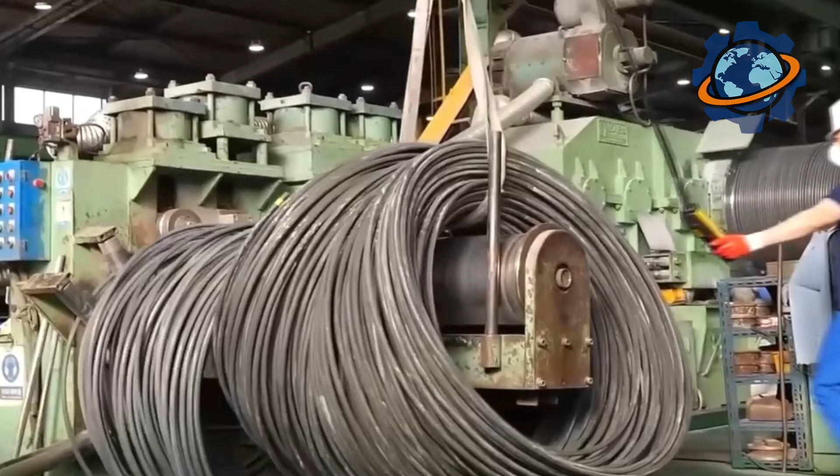And they don't just eyeball it. Quality control uses visual checks and special instruments to make sure that surface is perfectly clean. Before it moves on, the metal gets a temporary rust preventive coating to keep it pristine during storage and handling.

The main ways to make a bolt are cold forming and turning. Cold forming is the real workhorse here. That's where a machine takes the metal wire and shapes it under massive pressure, all without heat. The wire feeds through a series of dies that hammer it into the shape of a bolt. First, the round shank, then the head, usually a hex head so you can get a wrench on it. The beauty of cold forming is that it's incredibly precise, makes the steel stronger, and wastes almost no material.

Once the head and body are formed, it's time for the threads. Here, they use a method called thread rolling. Instead of cutting the threads, the bolt blank is forced between special dies that literally press the threads into the metal. This process makes the threads incredibly strong and durable. Some of these high-speed lines can churn out hundreds of bolts a minute.

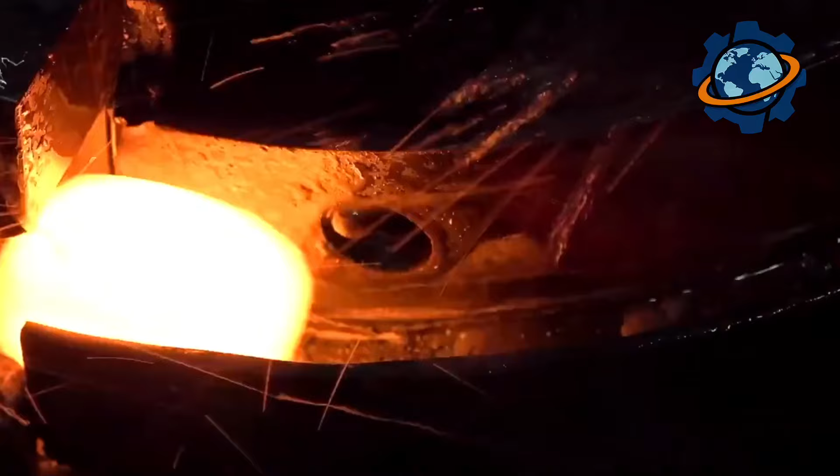For nuts, they often use hot forging. Steel blanks are heated up to a blistering 2,200 degrees Fahrenheit. That's about 1,200 Celsius, making the metal soft and pliable. Then, a press forges the iconic hex shape. After that, a hole is punched through the middle, and the internal threads are cut on special machines called tappers. Just like bolts, nuts go through heat treatment to make them tough and wear resistant.

Heat treating is where a bolt gets its backbone. It's a two-step process, quenching and tempering. First, in quenching, the bolts are heated up and then rapidly cooled. This makes the steel incredibly hard, but also brittle. So the next step is tempering. They're reheated to a lower temperature, which gets rid of the brittleness, but keeps all that strength. This is how bolts get their specific grade or property class.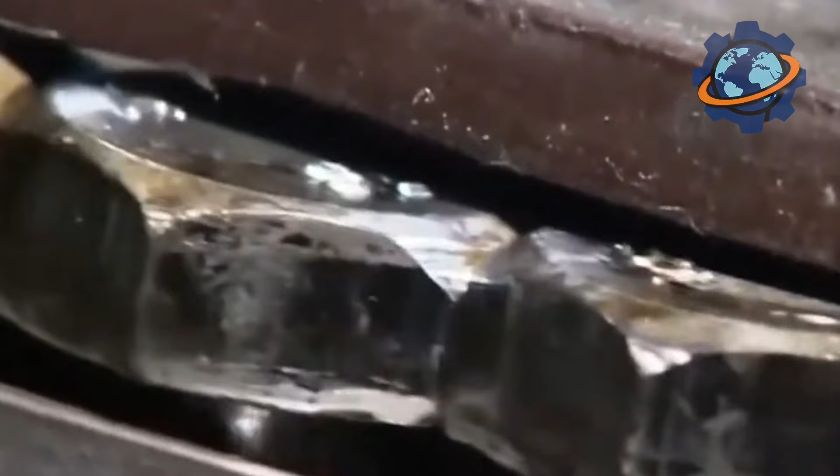After heat treating, every batch goes through brutal quality control. Sample bolts are checked for size, strength, thread accuracy, and any surface defects. We're talking micrometers, go-no-go gauges, and special optical sorters. Any parts that are out of spec are either rejected or sent back for reprocessing.

To fight off rust, most bolts and nuts get a protective coating. This could be zinc plating, hot dip galvanizing, or special zinc flake coatings. This is what keeps them from rusting away, especially out in the elements. The finished products are then sorted by size and strength, boxed up, and prepped for shipping.

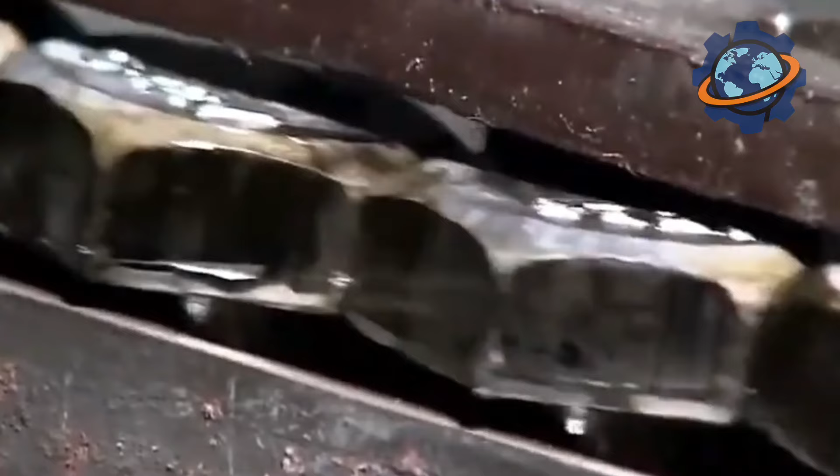Modern plants have automated lines cranking out hundreds of thousands of these a day. The parts travel on conveyors to automatic sorting machines that use optical sensors to check every last one. Anything that's damaged or not up to snuff gets kicked out. This makes sure only top quality hardware makes it to the packaging line.

From there, the nuts and bolts go into automated bagging lines with inline scales and counters that measure out the exact quantity for each package. This could be small plastic bags, cardboard boxes, or bulk bins, depending on what the customer needs. The packages are labeled with all the key info: size, grade, manufacturer, and date.

For big industrial orders, they're often packed in bulk bags or large containers to make shipping and storage easier. The whole process is automated to ensure the packaging is sealed tight to keep out moisture, dust, and prevent any damage in transit.

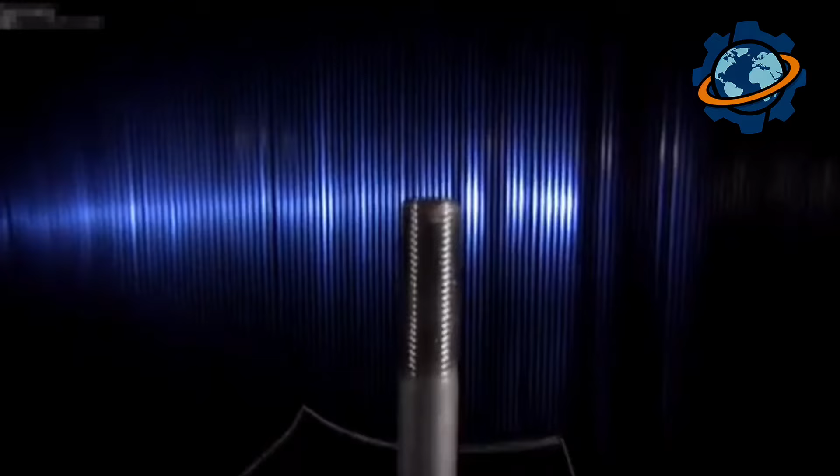Even though most of it is automated, there's still a human touch. For special kits or custom orders, workers will manually check the quality of the packaging, assemble the right mix of nuts and bolts, box them up, and get them ready to ship out. This flexibility allows them to meet specific customer needs with pinpoint accuracy.

After packaging, the products go through one last check to make sure the labels are right and the packages are sealed. Then, they're sorted in the warehouse by order and prepped for dispatch. And it's not just standard stuff. Many plants also make custom fasteners based on a customer's specific blueprints, which is crucial for specialized industries like aerospace, automotive, or heavy construction.

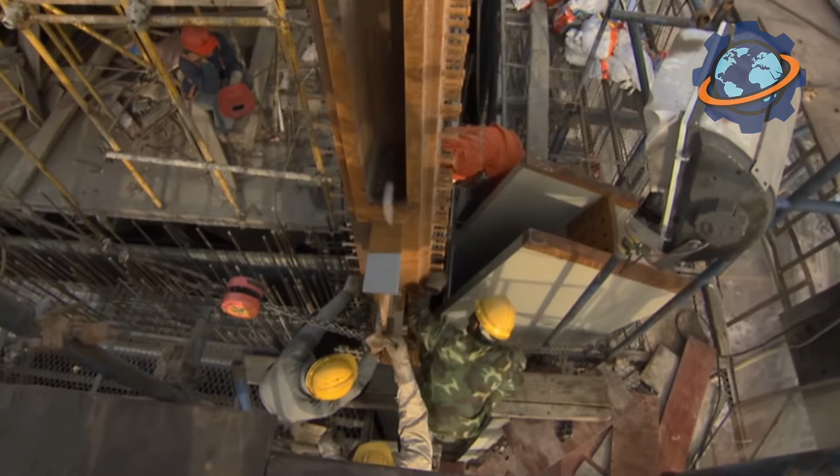The global market for fasteners is on a steady climb, and it's all driven by a few key things. First up, construction. As countries spend more on infrastructure, we're talking bridges, roads, and new buildings, the demand for these steel connectors goes through the roof. Second, the automotive and machinery industries. Every car, truck, and piece of factory equipment is held together by hundreds of high-quality fasteners. As those industries grow, so does the need for top-grade nuts and bolts.

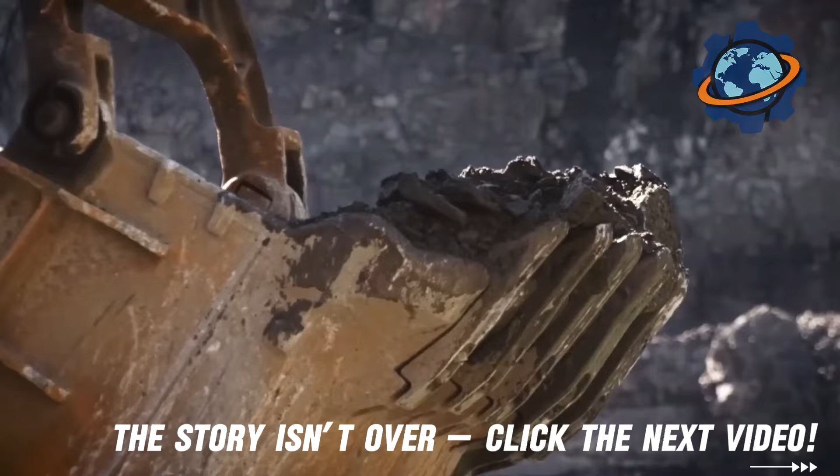For example, in Europe, car production is expected to climb, which directly boosts the demand for metal products, including fasteners. At the same time, the steel industry itself is getting smarter, using digital tech and automation to produce better, more specialized products. Of course, the cost of raw materials like iron ore and energy can affect things. But at the end of the day, as long as we're building, driving, and manufacturing, the demand for nuts and bolts isn't going anywhere.

Imagine this, a single piece of steel that can hold the weight of 100 fully loaded semi-trucks. How? It's all about a shape engineers call the I-beam. This isn't just metal, it's the backbone of our cities, born from rusted scrap and forged in lightning, fire, and thousands of tons of pressure. But here's the kicker. Why are brand new I-beams almost entirely made of the past? Cars from the 70s, rails from the 30s, even armor from World War II. All of it could be holding up a modern skyscraper. Stick around and you'll learn a secret that will change the way you think about the power of steel.

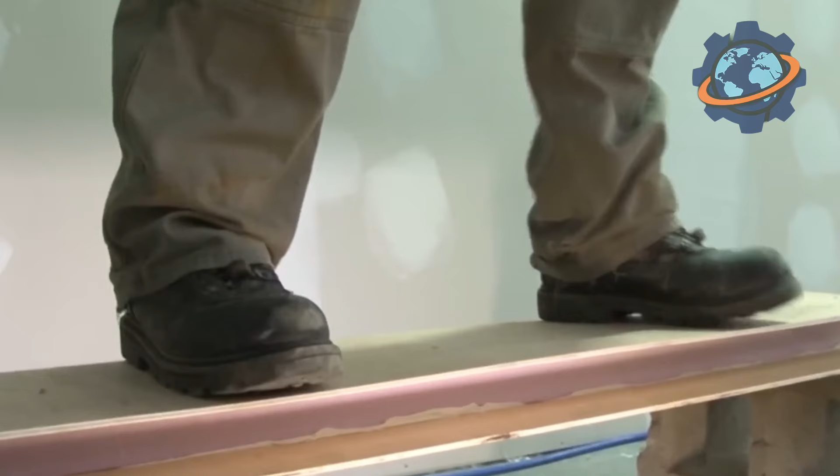The genius of the I-beam is its shape. The real heavy lifting is carried by the top and bottom parts, so that's where most of the metal is packed, in the flanges. The thin web in the middle just keeps them locked in place. This gives you maximum strength for minimum weight. And that strength is just insane. A single heavy I-beam, set up right, can handle loads of hundreds of thousands, sometimes even millions of pounds. Picture a whole line of fully loaded semi-trucks, all parked on one single piece of steel.

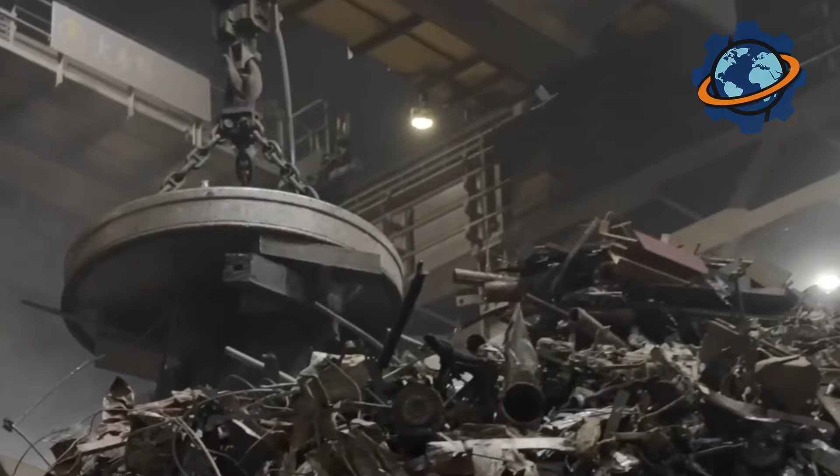That's real power. This story doesn't start in some shiny workshop. It starts in a massive, rusty, noisy yard that looks like a graveyard for metal giants. This is a scrap yard. Mountains of old cars, chopped up rail cars, building frames, and industrial junk are all waiting for a second chance. A giant crane with a powerful electromagnet drops down on the pile, and with a metallic groan, tons of old iron leap up to meet it. This scrap is the main ingredient. It gets loaded into a huge steel basket and sent to the melt shop for its trial by fire.

Steel is the undisputed champion of recycling. The recycling rate for structural steel in the US is a whopping 98%. That means nearly every piece of steel from torn down buildings, old bridges, and scrapped ships gets put back to work. On average, a new I-beam made today is 90% recycled metal. This creates an incredible, endless loop. A skyscraper going up today could have a piece of a 70s muscle car, a 1930s railroad track, and even armor from a World War II battleship inside it. This isn't just a hunk of steel. It's concentrated history, melted down and reborn for a new tour of duty.

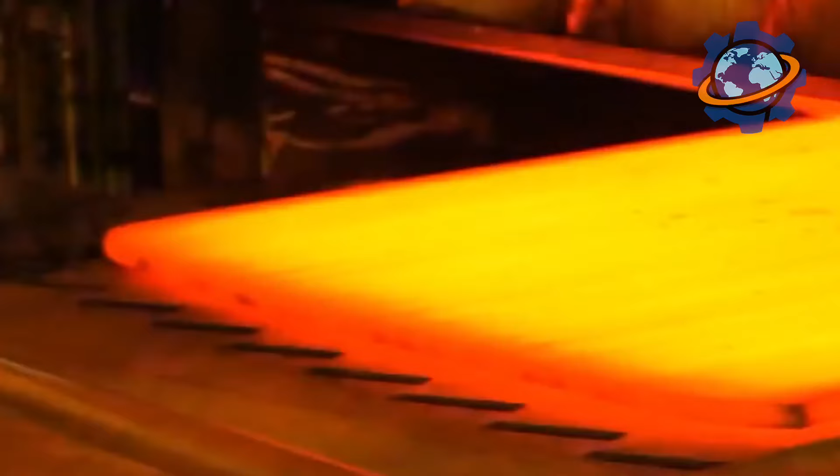So these numbers aren't just stats. They're the silent language our cities are built on, a language of strength, efficiency, and the almost endless life of metal. Every year, the United States cranks out over 5 million tons of structural steel, and the lion's share of that is I-beams. That's a number so big, it's hard to get your head around. Let's try. The steel in the famous Golden Gate Bridge weighs about 83,000 tons. That means, in 1 year, American mills produce enough beams to build over 60 Golden Gate bridges.

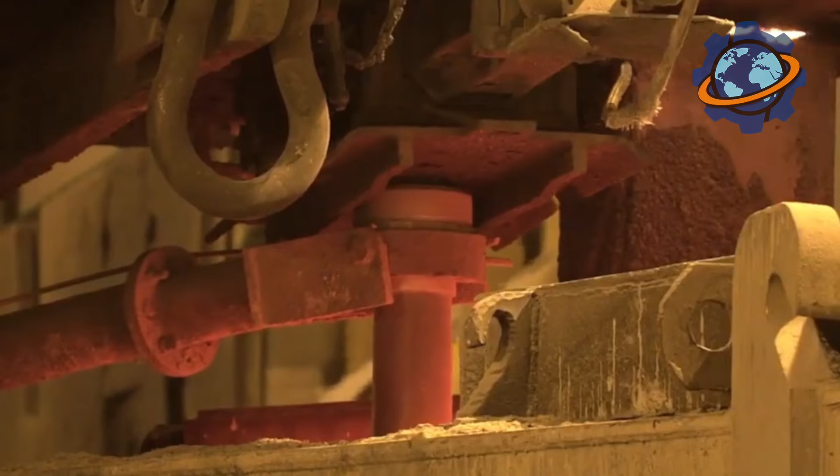The heart of the plant is the electric arc furnace, a giant kettle the size of a small house, where our scrap metal is dumped with a thunderous crash. 3 massive graphite electrodes, thick as ancient trees, are lowered in from the top. And then the operator hits the juice. An electric arc, basically a man-made lightning bolt, erupts between the electrode tips and the metal with incredible force. The shop fills with a deep, bone-rattling roar, and the light from the arc is blinding. The temperature inside instantly shoots up to 3,000 degrees Fahrenheit. The metal doesn't stand a chance. It starts to melt, turning into a boiling, blazing lake of steel.

Special additives are tossed into this molten bath to get the exact grade of steel needed, strong but flexible enough to handle massive loads. When the steel is ready, it's time to turn this liquid river into something solid. The molten metal is poured into a continuous casting machine. The blazing liquid flows into a special, water-cooled copper mold. As it passes through, the outer layer of steel freezes, forming a thin skin.

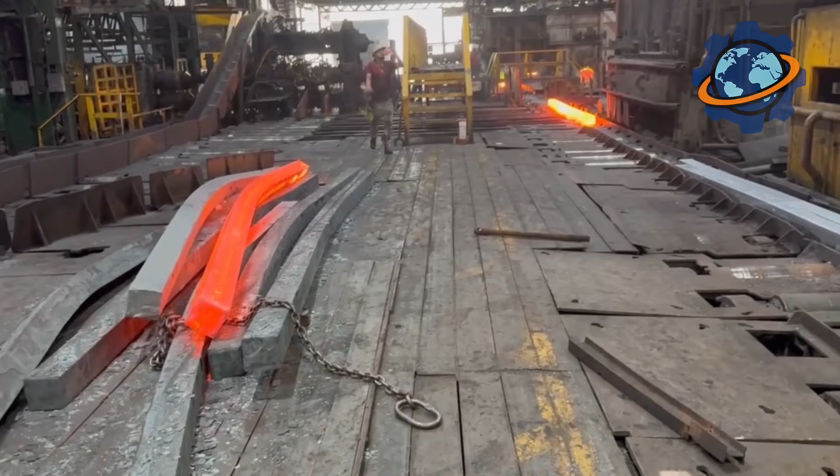Next, this still mushy on the inside ingot is continuously pulled downwards through a chamber of water spray where hundreds of nozzles blast it, forcing it to solidify all the way through. What crawls out of the machine is an endless, glowing red, massive steel billet. This is called a bloom. Automated torches hiss to life and slice off pieces to the right length, say 20 or 30 feet. This is our blank, our piece of dough that we're about to shape into a beam.

These hot, but now solid blooms are sent to the next furnace, the reheating furnace. It's like a giant tunnel with a fire roaring inside. The blank moves slowly through it, where its temperature is cranked back up to the perfect working heat, around 2,200 degrees Fahrenheit. It becomes soft and pliable, like clay, ready for the most important step, rolling.

And this is where the real show begins. The bloom, glowing a brilliant orange, rolls out of the furnace and hits the rolling mill. This is a series of giant steel rollers, like massive rolling pins, lined up one after another. But these rollers aren't flat. They have special grooves cut into them, shaped to gradually form an I-beam. The bloom slams into the first set of rollers. They squeeze it with thousands of tons of force, making it a little thinner and longer.

Out the other side, it's grabbed by the next set, which squeezes it from a different angle, starting to form the flanges and the web of the future beam. And so, step by step, passing through dozens of these roller sets, our shapeless billet is stretched and molded, taking on that familiar I shape right before your eyes. It's an incredible sight. A piece of glowing steel that started at 20 feet long gets stretched into a fiery ribbon hundreds of feet long.

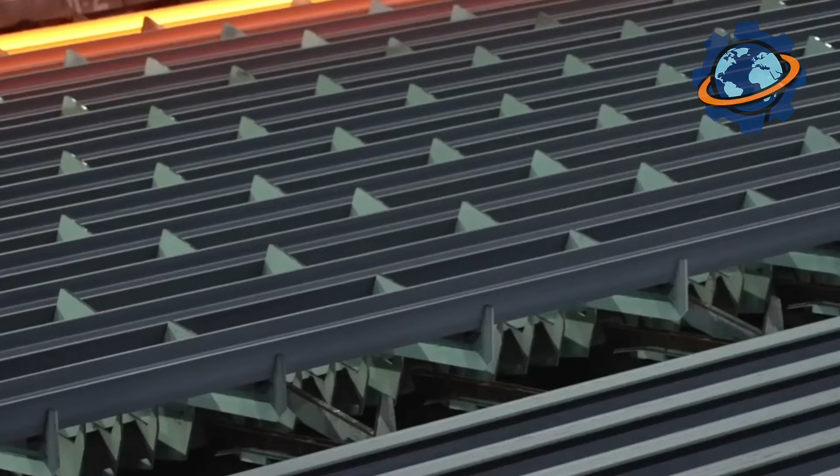The whole mill is filled with a symphony of bangs, screeches, and the hiss of water keeping the rollers cool. When the beam exits the final, finishing roller, it has the perfect shape and dimensions, down to a fraction of an inch. Hot, long, like a fire serpent, it travels down a roller conveyor to a massive cooling bed. This is a giant rack where the beam slowly cools, letting its heat radiate into the air.

As it cools, the metal shrinks a bit, and sometimes the beam can get a slight warp. To fix that, after it's cooled down, it's sent to a straightener. This thing is like a giant steel chiropractor, passing the beam through a set of rollers that align it until it's perfectly straight.

So, we have a perfectly straight, long beam, but it's not ready to ship yet. Time for the finishing touches. First, it's cut to the specific lengths the customer ordered. This is done by giant saws with blades 6 or 7 feet across. With a deafening scream and a shower of sparks, the saw cuts through the thick steel in seconds.

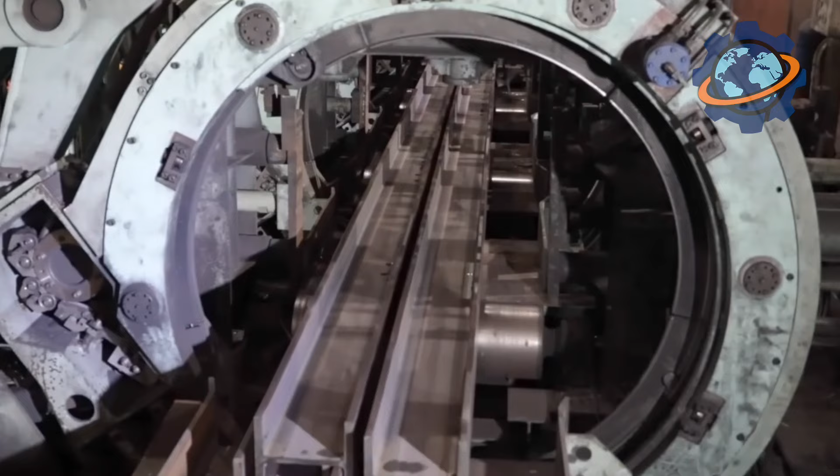Then, every single beam goes through a tough quality control check. Inspectors measure its geometry, and special ultrasonic machines scan the metal to make sure there are no hidden cracks or flaws inside. Only then does the beam get its marking, its birth certificate, with the steel grade, size, and batch number. The finished inspected beams are picked up by giant cranes and stacked in the yard, or loaded directly onto special railcars or trucks.

And just like that, this steel backbone, born from rusty scrap, forged through fire and pressure, is ready to ship out to a job site to become the silent but incredibly strong skeleton for a skyscraper that will scrape the clouds, or a bridge that will connect two shores.

Standard beams on a construction site can be anywhere from a few inches to 3 feet tall. But then there are the real monsters, the so-called jumbo sections, used in the most critical spots of skyscrapers. Their height can be over 4 feet, and their weight is something else. The heaviest ones can weigh over 800 pounds per foot. Think about that. Every foot of that beam weighs as much as 3 grown men. And a standard length for these things is 60, 80, or even 120 feet. A single one of those beams can weigh as much as a battle tank.